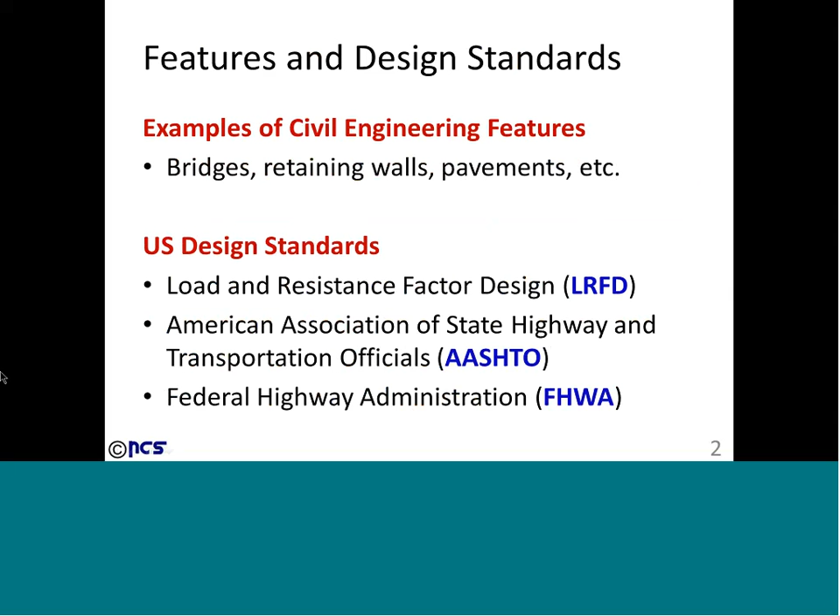Now the question comes up, what about LRFD versus other practices? The acronym LRFD is used specifically by AASHTO and the transportation practice in the United States. There are practices worldwide, for example Europe, Canada, Australia, Japan. In fact various agencies in the United States itself, like the Electric Power Research Institute, use nomenclature like limit state design or reliability-based design.

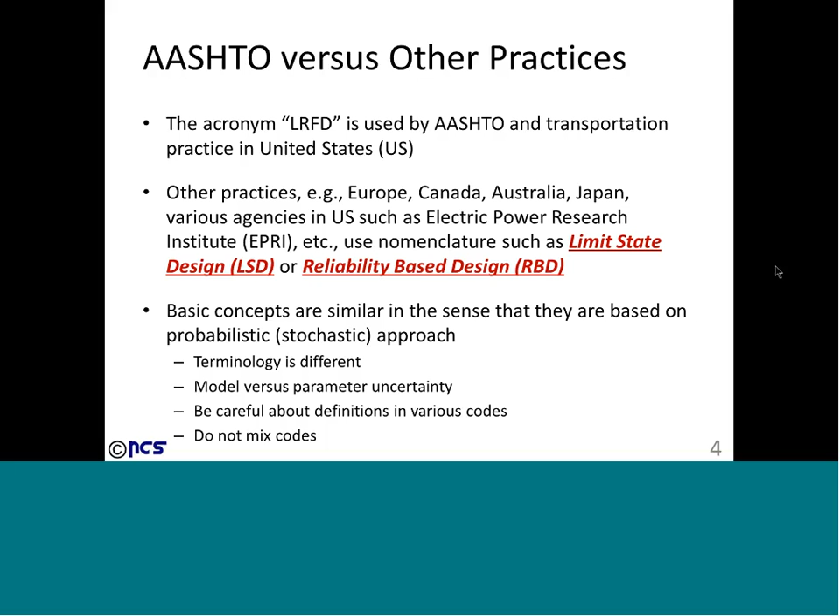So what I would suggest is that when you listen to this presentation, I'm going to make it a little bit generic so it applies in the United States as well as elsewhere in the world. What I would alert you is to be careful about the definitions in your respective codes, and one big thing is do not mix the codes. Don't start mixing the Euro code with the AASHTO code and so on, because you will be mixing several different concepts and creating problems.

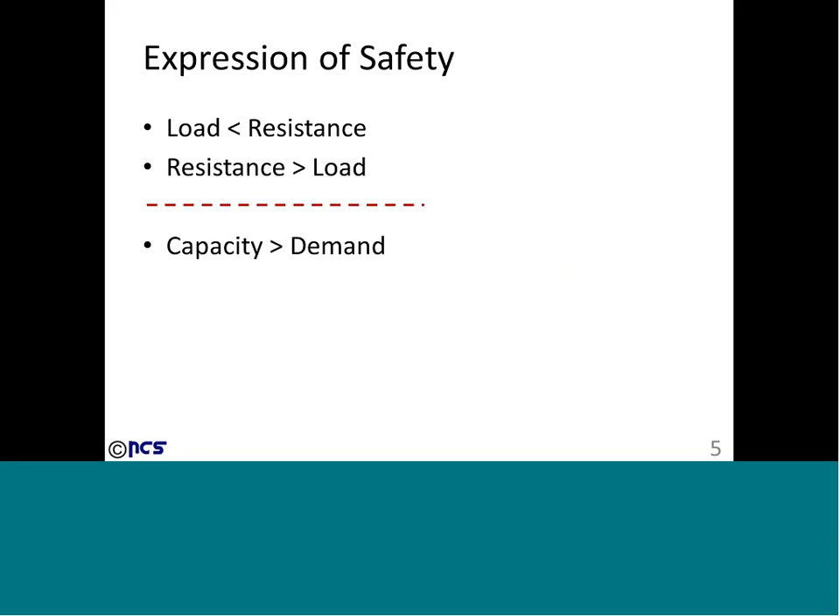Regardless of whether you are in Europe or Canada or Australia or wherever you are, the basic thing is that we want to make our structures safe. What is the basic expression of safety? Well, one might call it load less than the resistance. Somebody might say it's resistance greater than the load. Or some people might want to talk in terms of capacity and demand, so capacity is greater than demand, or demand is less than capacity.

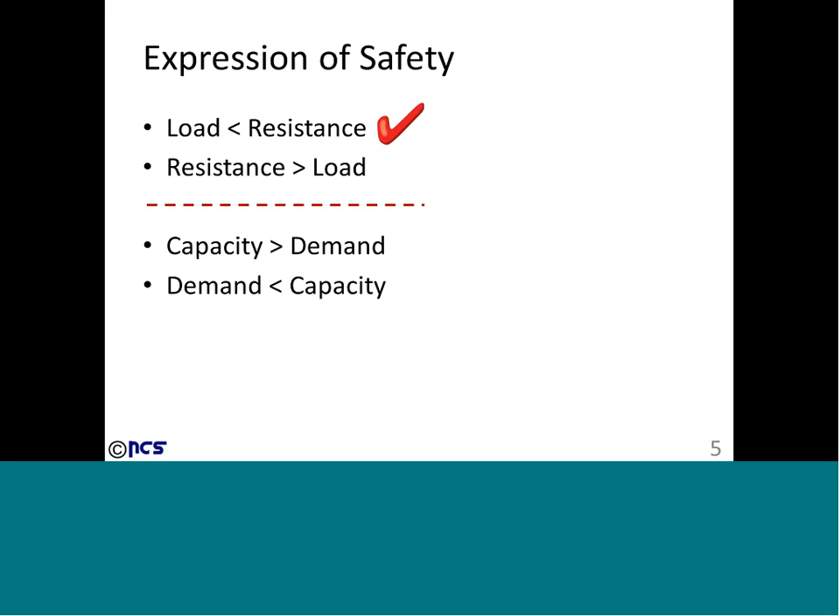In this webcast we are going to use the words load and resistance, and we are going to use the first expression of safety, which is load less than resistance. When you think about it, that expression of safety is also called a limit state, because if you violate that expression, you are violating a certain limit which can create a problem for you. So load less than resistance is a limit state, which if violated may lead to undesirable consequences.

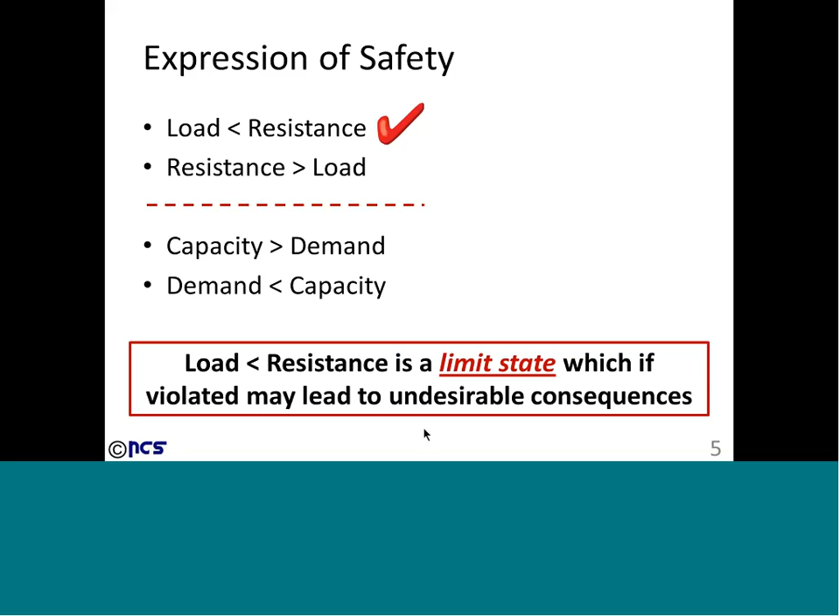Now, what is an undesirable consequence? Well, that would depend on the owner, on what they consider to be undesirable. We'll take a look at all of those kinds of aspects as we go on in the webinar. Now that we know that the expression of safety is also called limit state, and that's load less than resistance, let's designate load by Q and resistance by R.

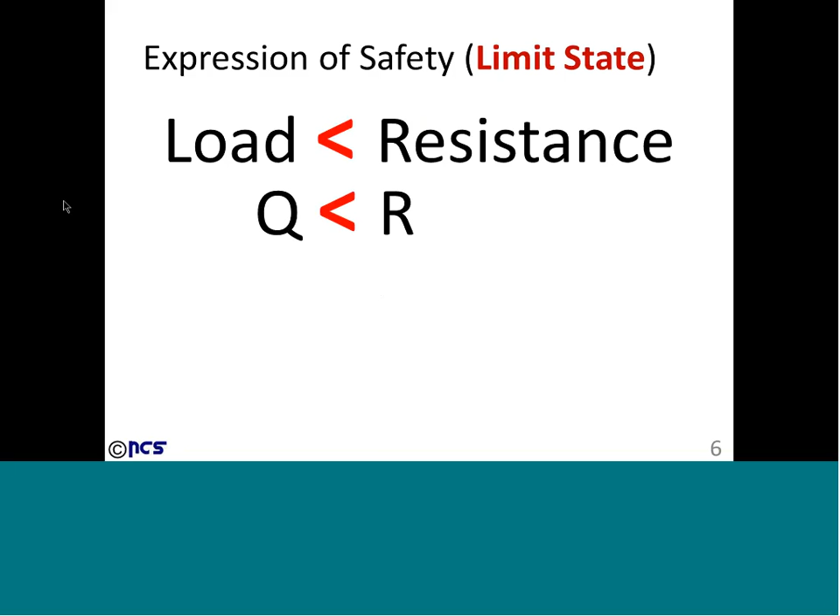You see that red symbol in there, less than? My question is, what does that mean? You might be thinking, why is this fellow asking me that? But what is really the meaning of less than or greater than in these kind of expressions? The meaning of less than is that load is less than the resistance after all the uncertainties in the load and resistance have been accounted for. On both sides of the expression you have incorporated your uncertainty. To characterize the limit state, you need a definition of uncertain events and uncertainty itself.

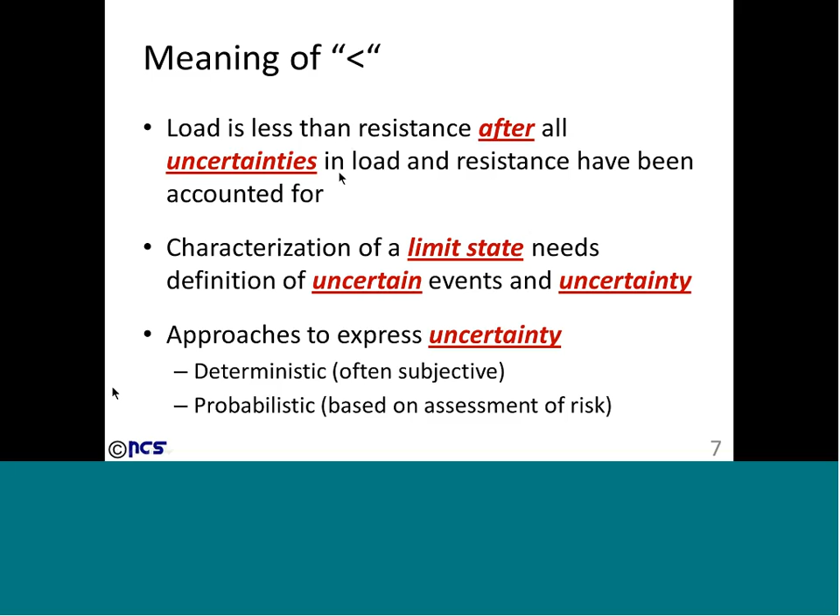So the question now is, how do I express uncertainty? There are two ways to do it: one is deterministic, and the other is probabilistic. The deterministic approach is often subjective, where people say, I feel it's safe, or if your structure has more resistance than the load, what we call a factor of safety. The other approach, the probabilistic or stochastic approach, is based on an assessment of risk.

Let's take an example. Everybody has driven on roads. Probably the way you came to your office today was driving a car, and you were on a roadway where there was a certain speed limit sign. What's the purpose of that speed limit sign? The limit state for that one is that your actual speed should be less than the speed limit.

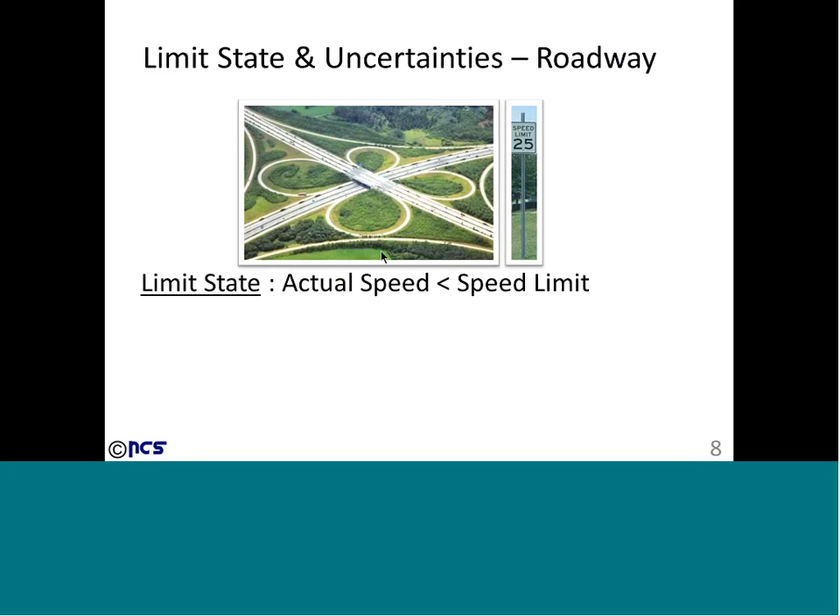What are the uncertainties in all of these things? The uncertainties might be the traffic count or data, the amount of traffic on the road. Even if you wanted to speed and it was bumper-to-bumper traffic, you could not have sped. Or if you have an empty road, then your temptation is to speed. It would also depend on the vehicle type and distribution, the traffic models used, and others.

But it's interesting - a stark reminder of a limit state every day is this fellow on the road in that car with flashing lights. If you are going to exceed the speed limit, you're going to pay the consequence, and that is an undesirable consequence. So you see how we can apply the concept of load and resistance factor design, also known as limit state, to commonplace applications.

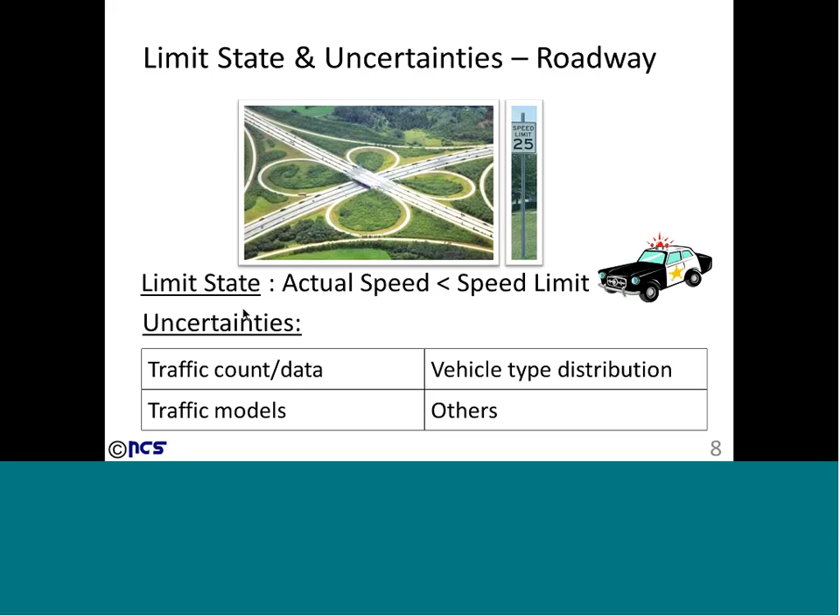And now this was for roadway. Let me take another example. This is a project which we had in Tucson where a wall just blew out on us. It was on a hillside, and what you are seeing is the portion of the retaining wall that just fell out on us. Now what's the limit state in this one here?

The limit state is that the load should be less than the geotechnical resistance. Geotechnical is for people like me who deal with soils and foundations, and if the resistance of that soil or foundation happens to be less than the load, then you have a problem. So our desirable limit state is to keep load less than the geotechnical resistance, and the structure should be safe.

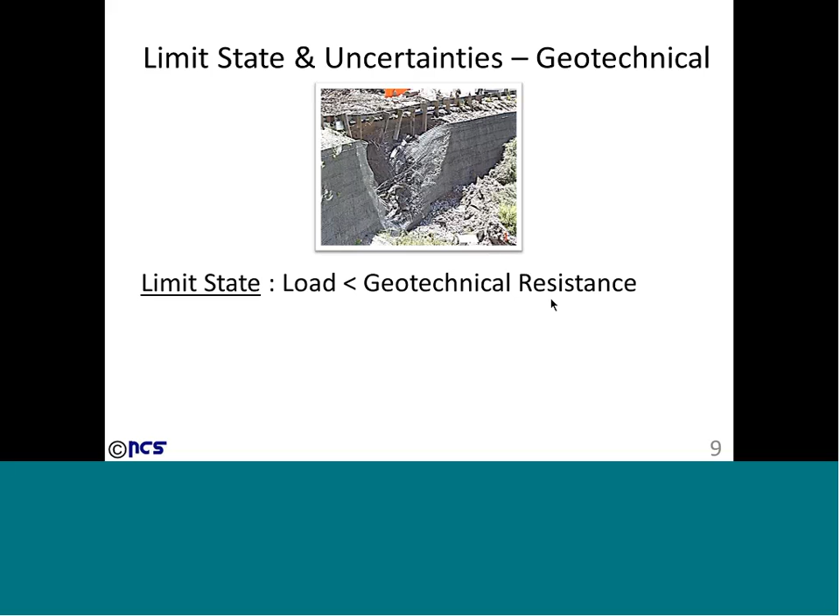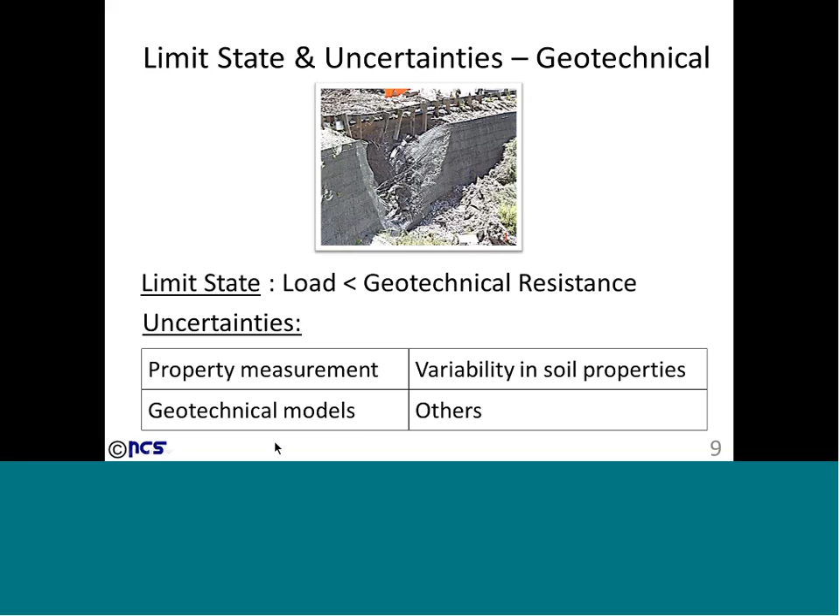So what are the uncertainties in this one? It might be the property measurement - how did you measure the load, or how did you measure the geotechnical properties? And once you define the geotechnical properties, what was the variability in those soil properties? What kind of model did you use? There can be a host of other ones there.

When I keep saying others, well, let's talk about other examples of limit states. You can really start talking about limit state in your everyday life, showing up on time. For example, if your appointment somewhere is at 8 o'clock in the morning and you showed up a couple of minutes late, is that a limit state which you violated? Yes, you did. What were the undesirable consequences there? Well, that depends on what you were late for.

Population growth, for example - if there's a new town being planned and they planned for 10 million people population, and started developing the infrastructure resources for only 10 million, and then the population just grew on, and then there was an influx of population and it became 12 million.

Well, what happened to your resources? That's a problem there - occurrence of a crack in a structure. Look around your building wherever you're sitting. Do you see a crack in a structure? Is that a limit state?

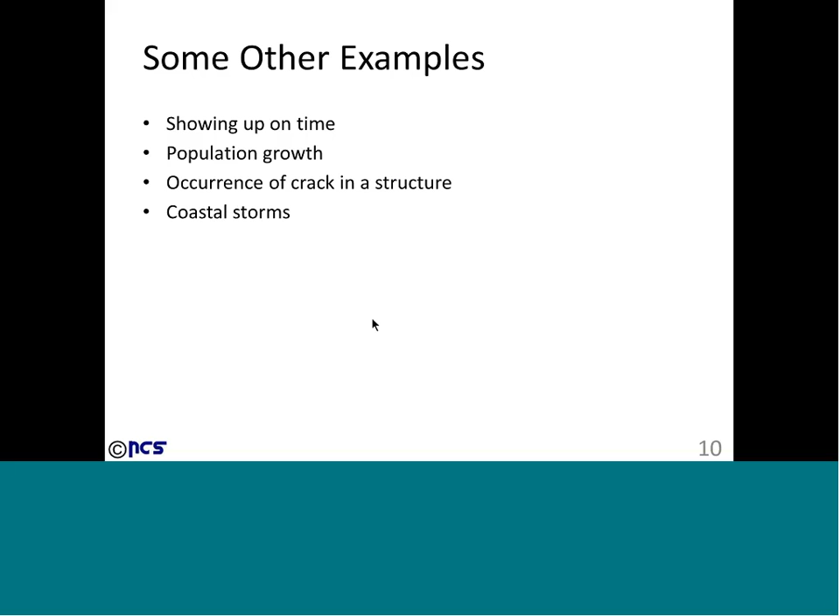Coastal storms, games - you can play games and you can have problems there. Conflicts, wars and things like that - you can use load and resistance factor design. There are many others. In fact, your imagination is your limit, and if you take a limit state based on your imagination, then consider this.

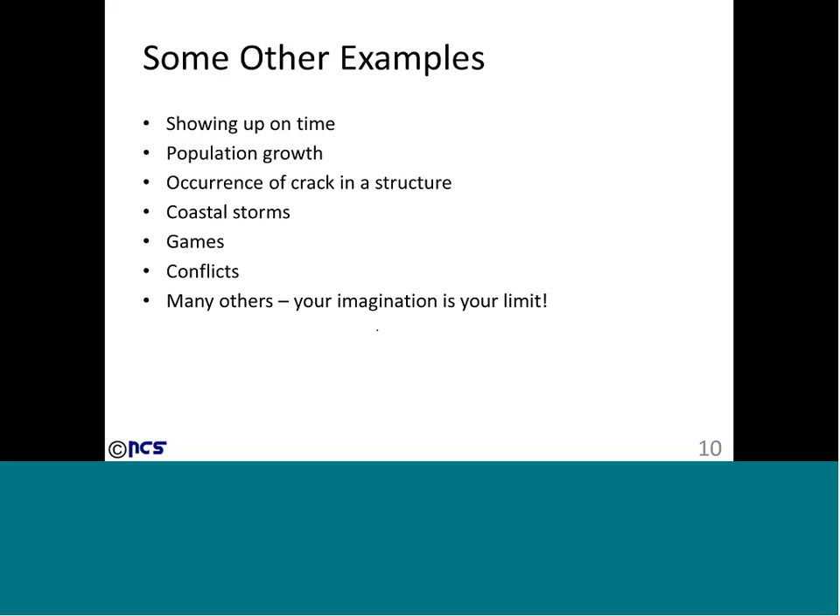The reality might be the resistance while imagination is the load, right? So what happens in all of these things is that you can use any consistent quantities on both sides of the inequality and express the limit state.

Now when you do that, you need to incorporate the uncertainty on both sides of the inequality. Now, what uncertainties? There can be many uncertainties. I'll take some of the most mundane or the esoteric ones.

This happened to be in February of 2011. So you can have coastal storms, you can have superstorms. We are in an election season here in the United States. How will the whole thing turn out? There's uncertainty on both sides of the political parties.

You can have others - you might have construction, bidding, human error, a bunch of different ones there. So the question now comes in: all right, I got a lot of uncertainty. Let's first of all try to categorize it. When I try to categorize it, I might say it is a natural uncertainty or a knowledge uncertainty.

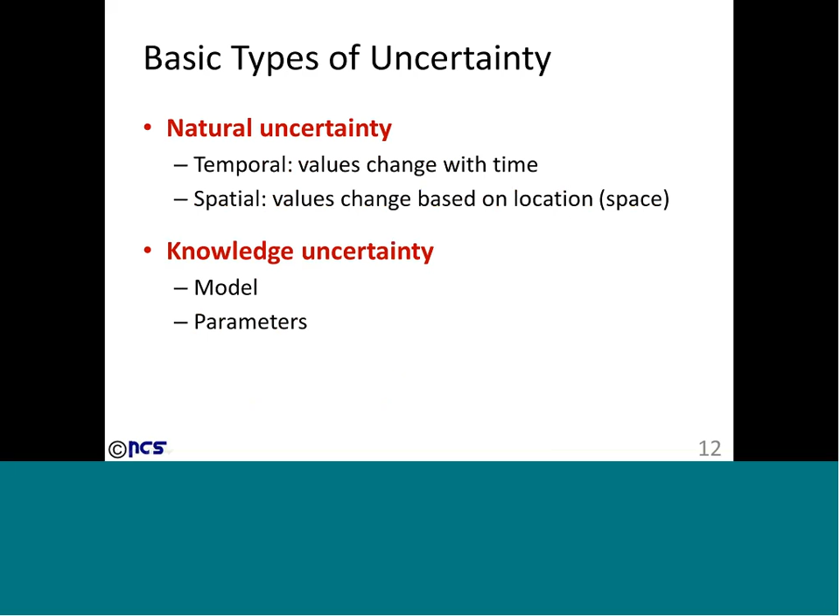But to all of those uncertainties, we are going to be applying a model to show our knowledge of the uncertainty, and each model is going to have certain parameters which by themselves will have uncertainty. So how do we characterize all of these things quantitatively?

Where do uncertainties apply? Well, all of us agree that it applies to all aspects of design, regardless of the structure type, size, or location. Whether I'm sitting here or I'm in Argentina or in Australia or things like that, the uncertainties still stay there. In fact, they affect all design features.

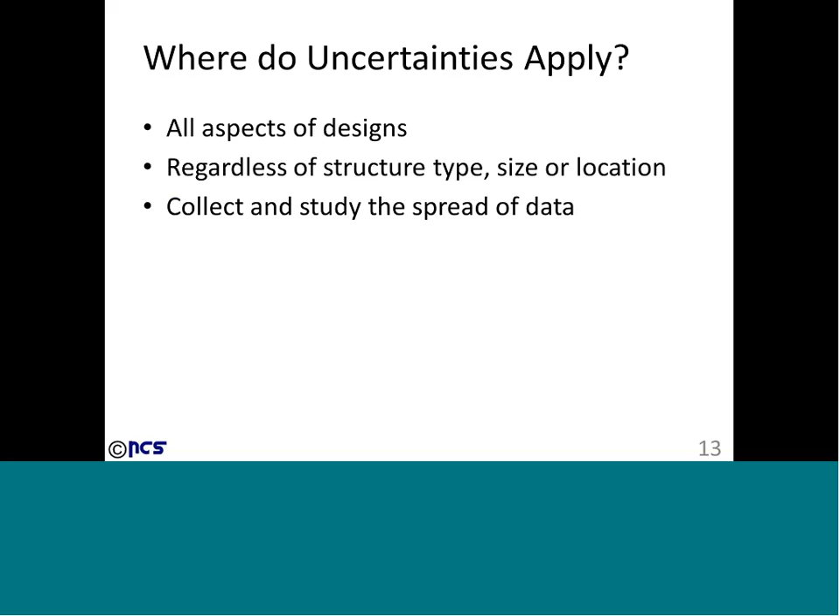So what should we do? Well, we need to try to quantify uncertainty. So what we are going to do is try to collect the data and study the spread of the data. How do we do that?

Let me take a very simple example. I got a concrete cylinder here - I've shown a cylindrical shape. Let's assume it's a concrete cylinder and that I'm going to put a load on top of it. When I put a load on top of it, I get what I call unconfined compressive strength of a cylinder in pounds per square inch.

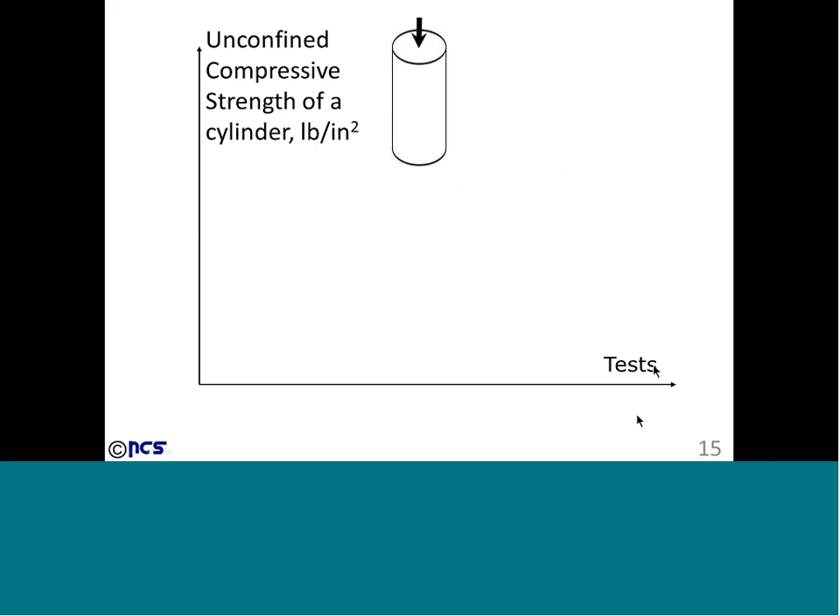And let's say I'm going to do a number of tests which is shown on the x-axis, and let's say I did 28 tests. I got a bunch of different values of the unconfined compression strength. The maximum value was 3600 psi, the minimum value was 2300 psi, and if I take an average of all of these things, the mean value, then that's 3100 psi.

Well, that's nice - I see all of the data spread around the mean. Is there a way that I can capture that data spread? Well, what we can do is say the mean is the peak value and the data spreads around from it, and as you go away from the mean value on either side, the chances of you having a data point lying towards the tail end of it starts to become remote. Not zero, but a small amount there.

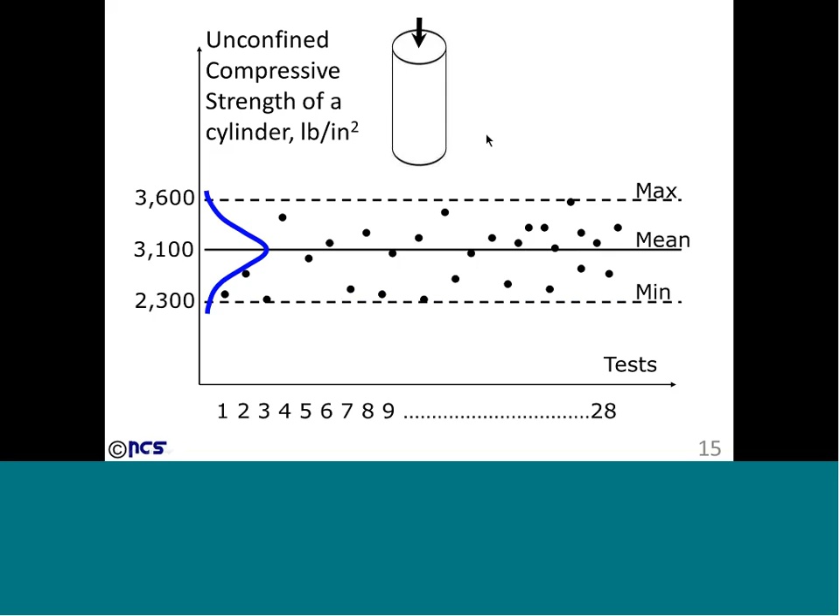So this kind of a curve, we can now start looking at it, and it's called a probability distribution function or probability density function or whatever you want to call it there.

But it looks like a bell, right? So oftentimes it's called a bell curve when it's a normal distribution. This particular curve was for a certain max, minimum, and mean value for the data set I showed you earlier. What happens if I add more data points to it? The shape of the curve would be sharper, taller, because now we are less uncertain since we have more data.

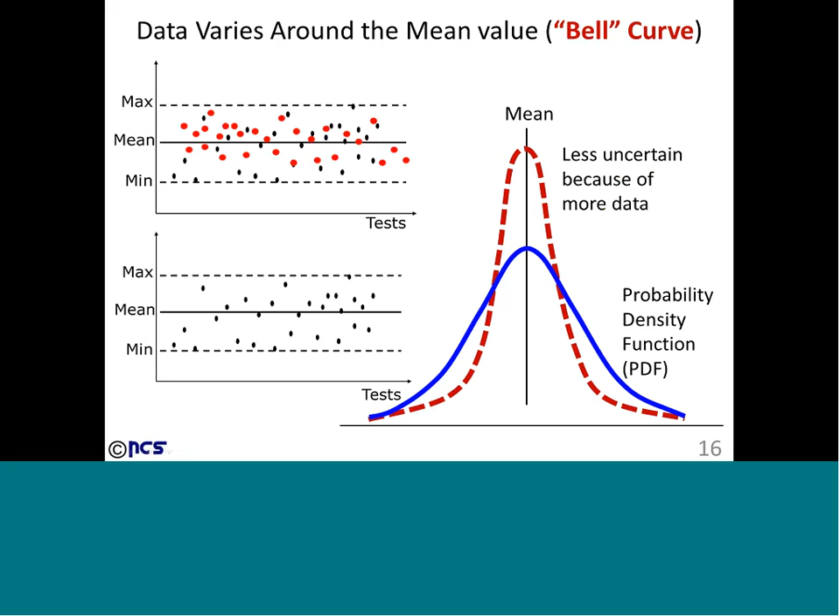So you see, it all comes down to how much data you have and how you are going to be fitting a probability density function or probability distribution function to characterize the uncertainty. Let me repeat again: the mean value is the most probable value, and there is a chance that value might not occur, and that chance is described by the shape of the probability distribution function around the mean.

So when we look at the probability distribution function, we're trying to address: what is my probability that a limit state might be exceeded? What's the probability of something happening? Well, that's where we have to look at the area under the curve, because the probability of 1, or some people call it 100%, is actually the area under the probability distribution function.

So if I look at this bell curve or normal curve, you'll see a nice bell-shaped curve, and M is the mean value right at the center where there's a peak. S is the standard deviation, and we can use coefficient of variation, which is standard deviation divided by mean. Coefficient of variation is often a better method to characterize the spread in the data, because you're often dealing with several different data sets with quite different mean values and standard deviation values. So to compare variables across different data sets, it's useful to have coefficient of variation, but that's your choice.

Now you see what I'm calling it here - I'm calling it a two-tailed representation, because I've got a tail on one side and a tail on the other side. Depending on how far I go from the mean, either to the left or right side - for example, if I go 1 standard deviation on each side, then about 68% of the data is contained within that zone.

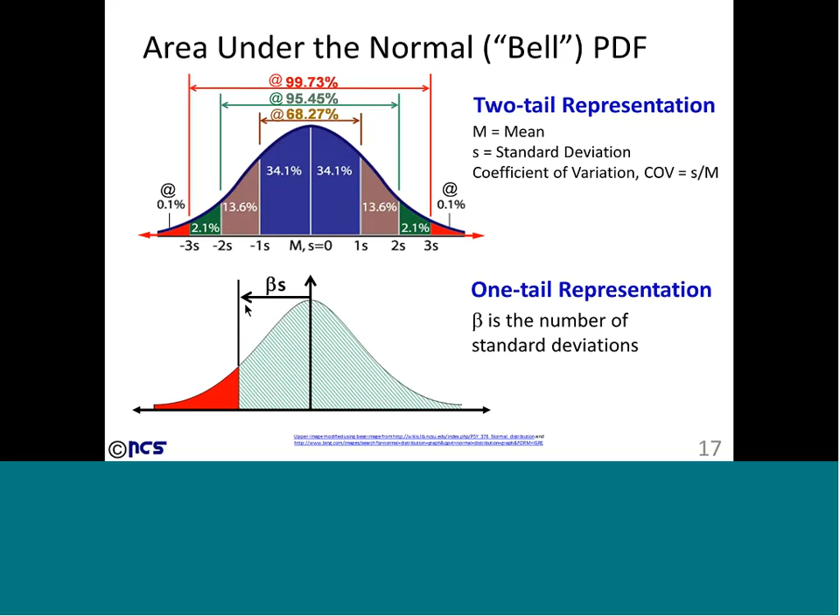I'm going to be using the same concept in terms of what I call reliability index later on. So what I'm showing to you is that the things which are already available in the literature, how we will be using it in the load and resistance factor design concept.

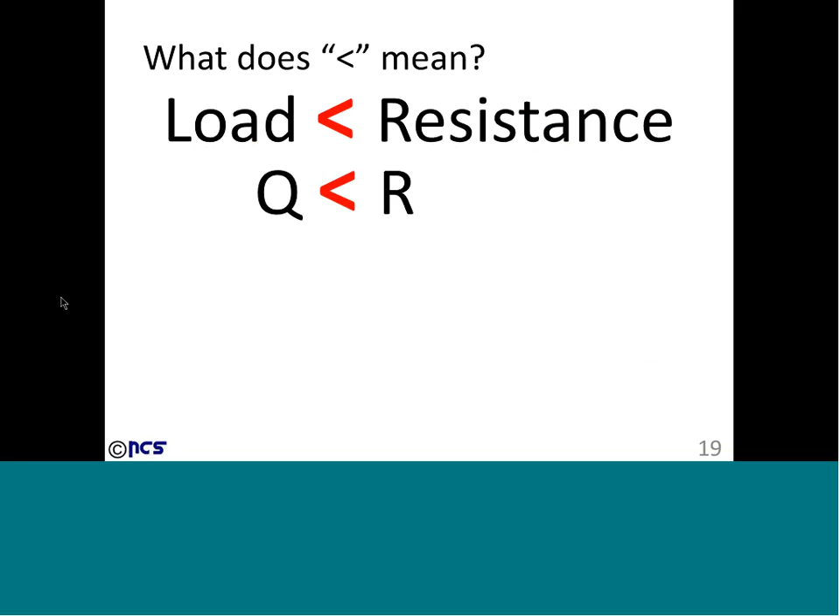All right, so now coming back to this slide again, what does the less than mean? Well, Q less than R means that we need to account for uncertainty on the load side, uncertainty on the resistance side. So I can have a probability distribution function on the load side, and I can have a probability distribution function on the resistance side.

Where do those distribution functions come from? Well, let's look at it as follows. We'll come to that in a minute, and @RISK gives us an opportunity to have a number of different distribution functions. But before that, let's study this concept of safety once more so everybody understands how we are going to use it.

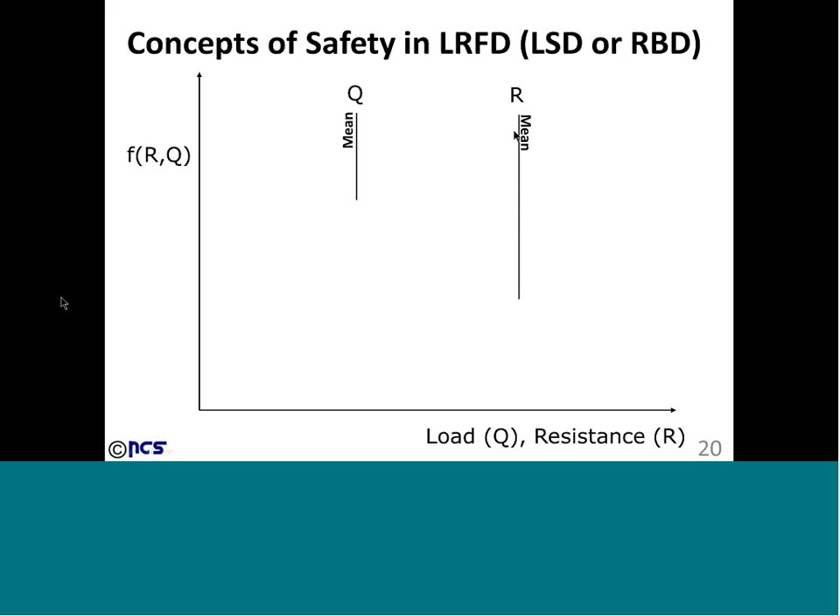We know that the load has to be less than the resistance, right? That's the limit state. So if on the x-axis I'm plotting load and resistance, then by that definition, the load has to be on the left-hand side of the resistance, correct? Because only then it would be load less than resistance. And what I'm plotting here is the mean value of the load and resistance. The distance between the two, the resistance minus load, one can think about it as a safety margin.

More the distance, the safer the design feature. Or you might take the ratio of the two and call it the factor of safety, the resistance divided by the load, the mean values, and as long as that value is greater than 1, then the structure is safe. Well, the safety margin and the factor of safety are what we call the deterministic expressions of safety.

Why? Because nowhere in this definition have we accounted for the spread of the data around the mean. We simply use the mean values to get an idea about safety. That's what deterministic thing is all about. But now, do you think a factor of safety greater than 1 means that the structure is absolutely safe? Or a safety margin greater than 0 means the structure is safe?

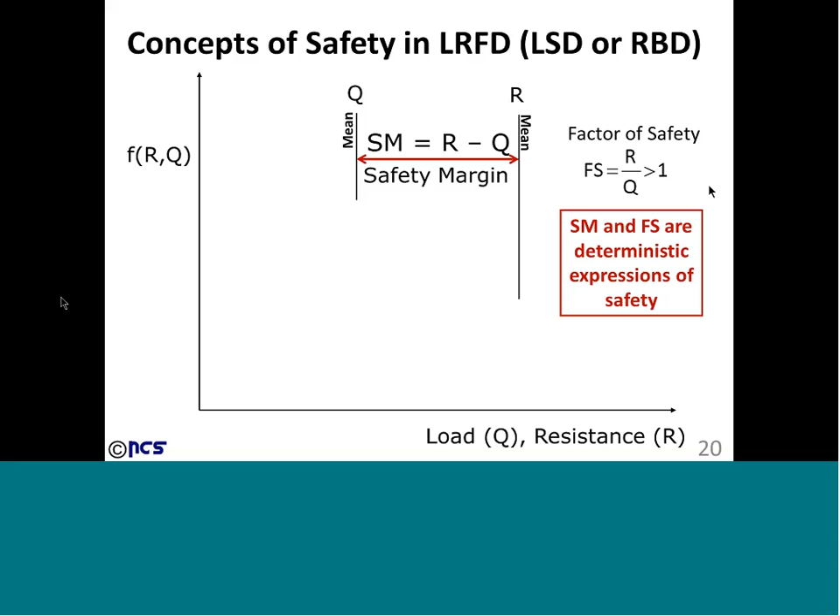Well, we are in for a rude shock now. How is that going to happen? Well, let me now plot the spread of the data. This might be the spread of the data for the load, and look at the tail end of it.

It goes quite far. Now I got the spread of the data from the resistance. That's nice, but they're overlapping. What is going on here? Well, in that overlap zone, I either have load greater than the resistance or resistance less than the load. Either way, it's trouble for me.

It's a danger zone. In that particular red zone or the shaded zone, which I just did here, there is a probability that failure can occur. So you see, my friends, what seemed safe from a deterministic viewpoint still has a probability of failure. And our job is to figure out what that probability of failure is, and that is the essence of LRFD.

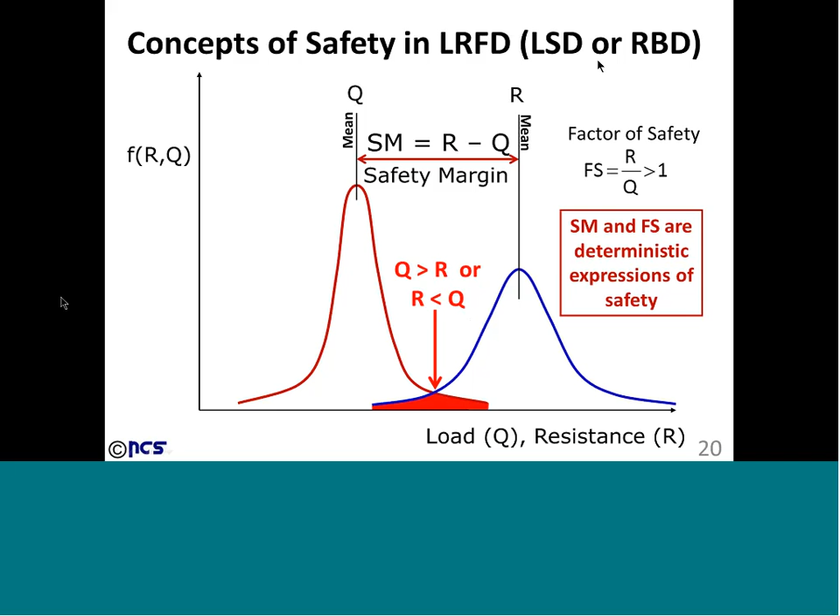Or if you want to call it limit state design, or if you want to call it reliability based design, or stochastic method, or whatever you want to call it. So we are going to study that.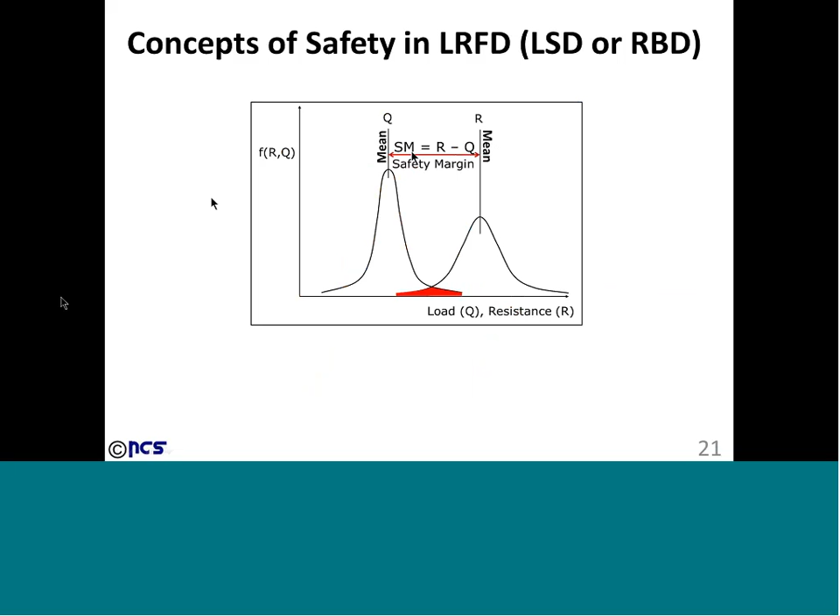So now when I look at it, I put a small inset of that figure which you saw on the previous slide there, and we learned that even if there is a safety margin, there is still a probability of failure. And now our job is to control the size of that red overlap zone by ensuring a certain safety margin for a certain probability of failure. When I say failure, what does that mean?

It can mean a lot of different things to different people. Basically, what I think of failure is a certain adverse event where the event is defined by the owner who's trying to understand the problem.

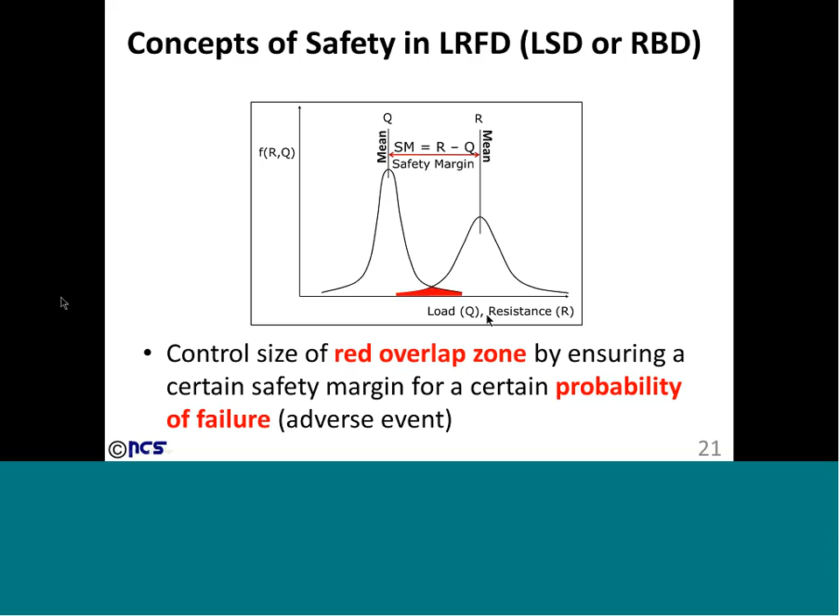So now when I take a look at it, the problem reduces to as follows: I need to control this red zone, or what I will call the danger zone or the overlap zone. How do I do that? Well, that's where I need to get into risk and reliability.

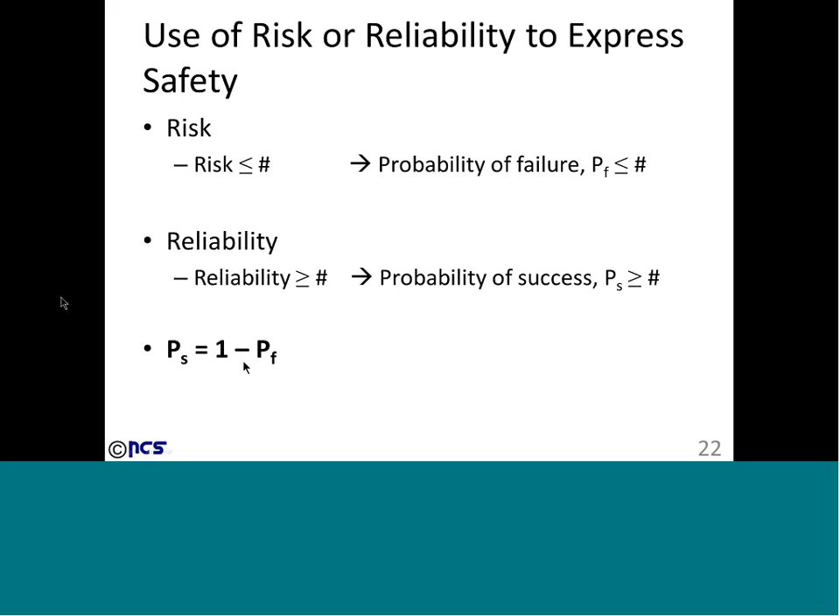Let's understand what risk and reliability mean. They're actually complementary terms. They do not mean the same thing. In fact, they mean exactly the opposite. Risk is associated with probability of failure. Reliability is associated with probability of success. Since the total probability is 1 or 100%, one can say that the probability of success equals 1 minus probability of failure. A very basic definition, but we need to understand that when we talk in terms of success, we are talking about reliability. When we talk in terms of failure, we are talking about risk. Keep that in mind.

Now let's talk in terms of numbers, just to make sure I hit home the point here: risk or reliability. Say probability of failure is 10%. What does that mean? When people say there's a 10% risk, they're actually saying that the probability of failure is 10%, or there's a 1 in 10 chance of failure.

There's a better way to talk about it. You might say probability of success is 90%, where you might say, hey, the car which you are buying from me is 90% reliable. Well, that sounds better than saying there's a 10% chance of failure, right? So that's one way of talking about it.

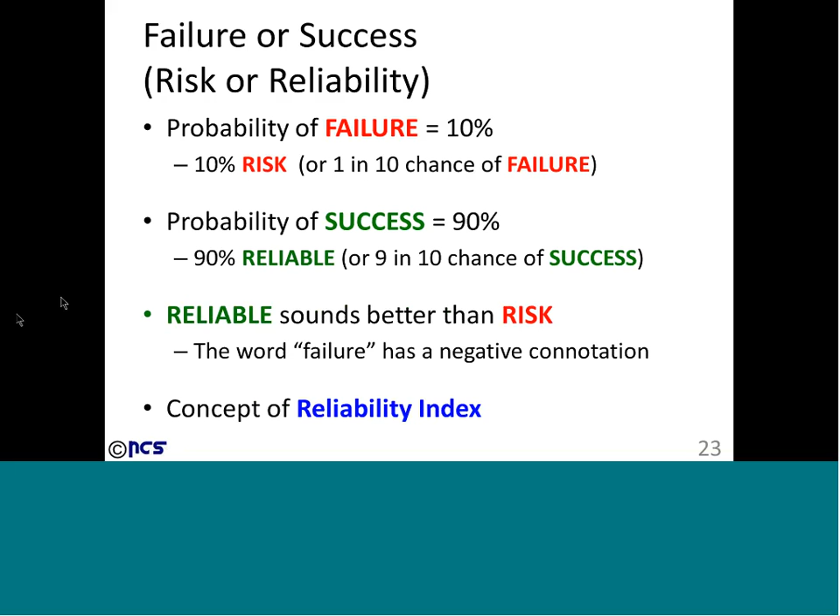So it's reliable. Reliable obviously sounds better than risk. Why does it do that? Because the word failure itself has a negative connotation, and we need to characterize that. So rather than talk in terms of failure, we are going to introduce a new concept called the reliability index. Now, when I talk about reliability index, by necessity I'll have to talk about the probability of failure, but the essence of all these design procedures - the LRFD, the limit state design, the reliability-based design - is all to characterize a reliability index. Let's see how that can be done.

I bring up this figure again, which you have seen before. The red overlap zone is what we are trying to control. That red overlap zone - listen to me carefully - it is basically an eye candy. Looks sweet to your eyes there, but it's just conceptual. We need to make sure that we can characterize the area of that overlap. You remember that area under the bell curve, where we went to the two tails and then I converted it to one tail representation?

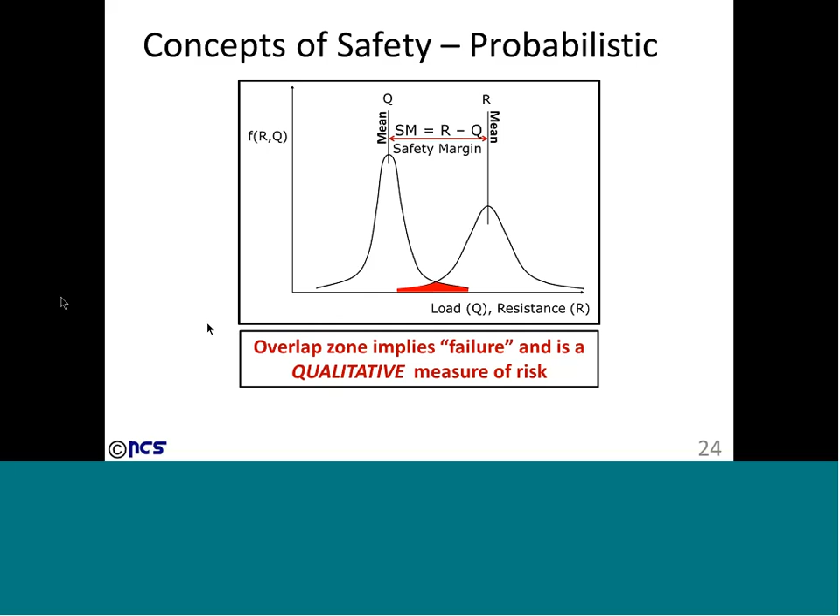Well, forget about two tails. I've got four tails here - two tails each for the load and resistance. And now two of those tails are overlapping. I have really made my life miserable here, correct? Well, I need to get a way out of this, because I need to measure that overlap zone. And how am I going to do that? I need a quantitative measure, and this is how I'm going to do that.

What I'm going to do is write a limit state. And instead of saying the resistance is greater than the load, or load is less than the resistance, I'm going to take these two probability distribution functions and deduct the probability distribution function of load from that of the resistance. Once I do that, I get a one-tail representation. Now I've combined two probability distribution functions into one. And magically, I get everything into a one-tail distribution, and all the concepts I told you before fall into place.

Look at that red zone there. You remember that red zone? I can figure out that red zone in terms of the number of standard deviations distance from the mean. You remember that?

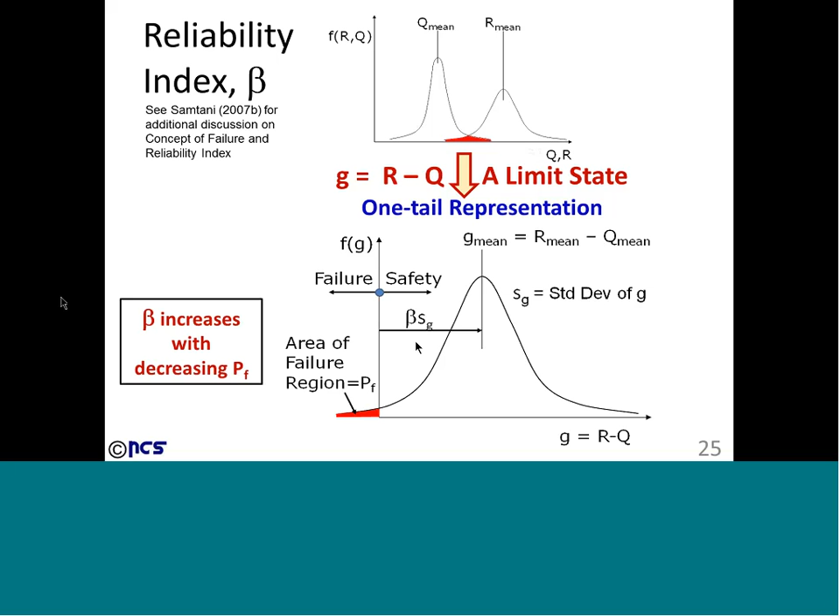Now, to close the circuit on this one here, what is the mathematical relationship between beta and the probability of failure or the probability of success? Well, I told you that the probability of success is equal to 1 minus probability of failure. So you can choose to express it whichever way you want, but basically it comes down to measuring the area of the curve to the left-hand side or the right-hand side of the vertical axis.

If you measure the area of the curve to the left-hand side, it's the probability of failure. If you measure the area of the curve on the right-hand side, it's the probability of success there.

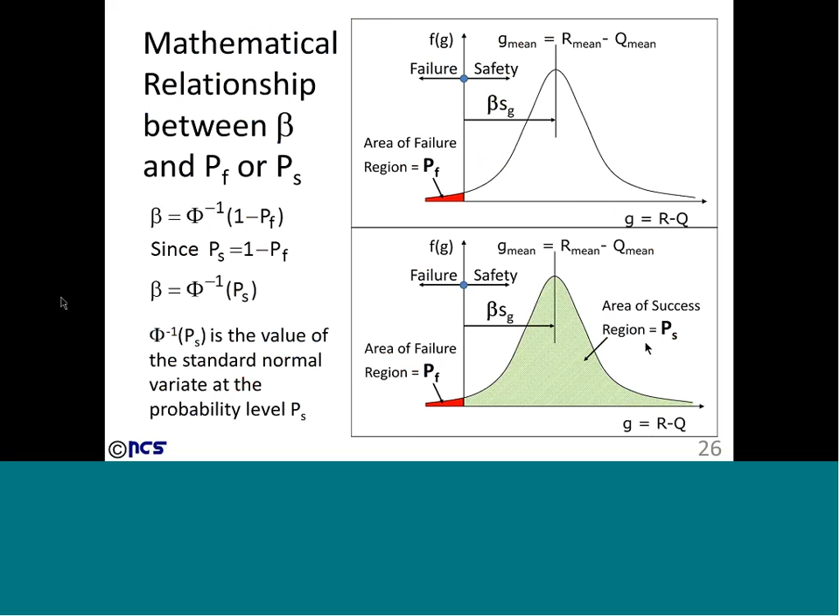Microsoft Excel has a neat little formula where it defines the probability of failure. Now, the beauty of the @RISK program is that it is indexed to Microsoft Excel. So anything which you have in Microsoft Excel is available to you in @RISK, because @RISK is an add-in to Microsoft Excel. So now we have got two very powerful programs working together at our fingertips, and we can work magic on this one here, and I'm going to show you all of those things.

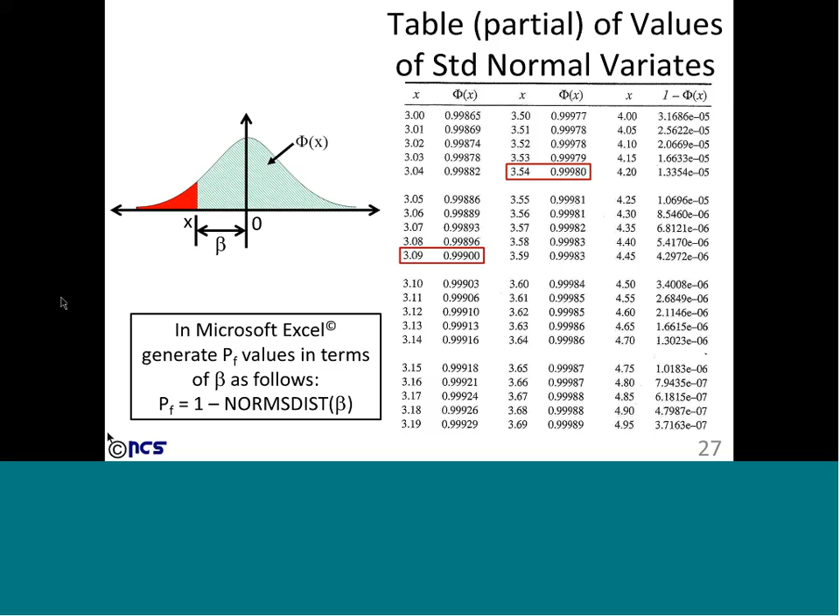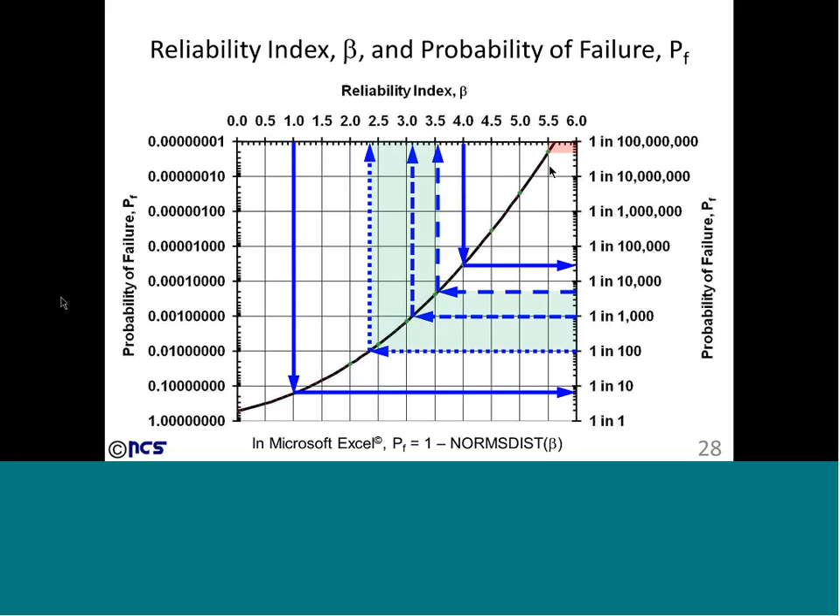To put it in context again, all of this probability of success, failure, and the reliability index, I put together a simple table. Success on the left-hand column and probability in the three columns, expressed in percentage or 1 in X. So 90% success is 10% failure, or 1 in 10. If I want to express it in terms of reliability index: 1 in 10 means a reliability index of 1.3. 99% success is 2.3 reliability index. 99.9 is 3.1, 99.99 is 3.7, 99.999 is 4.3, and 99.9999 is 4.7.

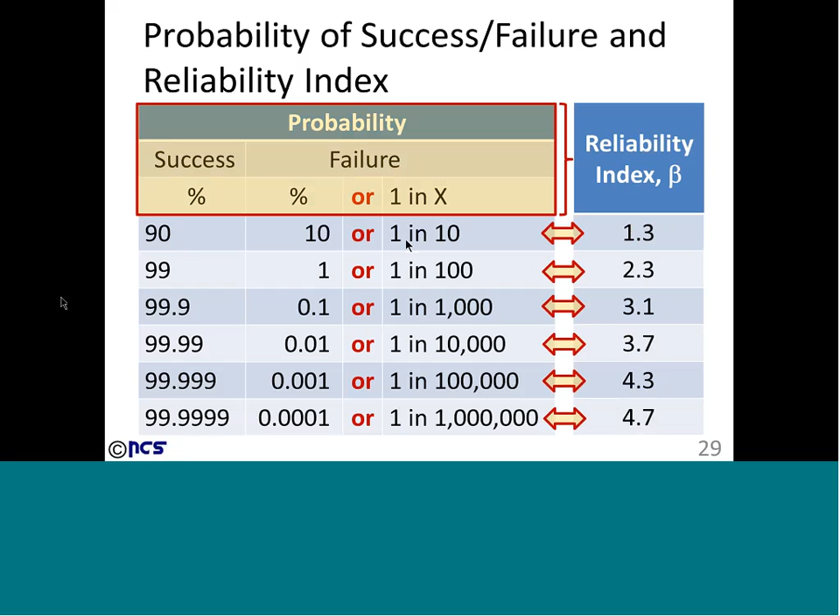Coming back to civil engineering features, what AASHTO has said is that the probability of failure we want for superstructures and substructures is 1 in 5,000, and for our foundations is 1 in 100 to 1 in 1,000, exactly what I showed you in the previous slide. What it means is that our playground for reliability index is 3.54 for superstructures and about 2.33 to 3.09 for foundations. All right, that's good, now we know what we are dealing with.

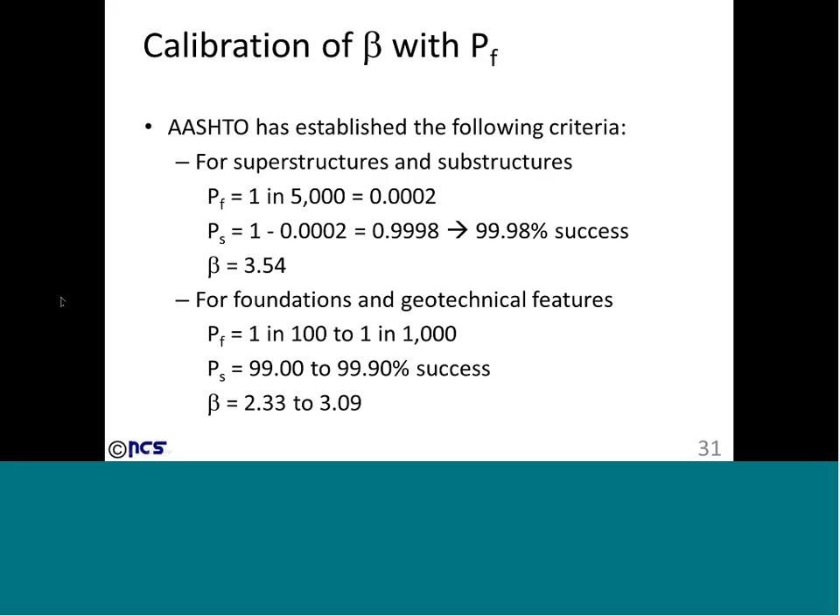Remember, I told you early on that you have to define uncertainties and figure out what you are working towards. Now that I got my marching orders, I know what I'm working towards: a reliability index ranging from 2.33 to 3.09 to 3.54. That's my play field, okay? And how am I going to achieve that desired level of reliability?

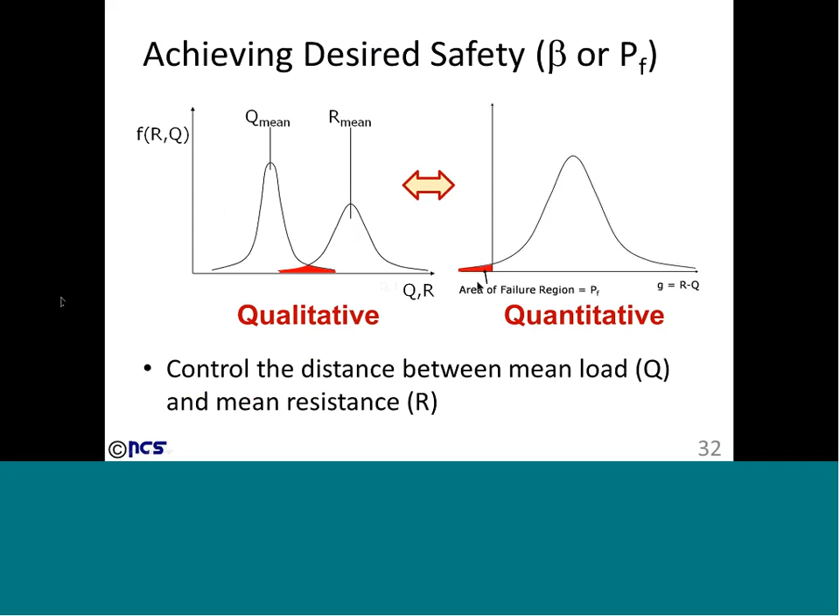Well, I'm going to go from the qualitative overlap zone to a quantitative overlap zone, which is the area of the curve to the left-hand side of the vertical axis. Here is what I'm going to do: take a look at this figure again, you're seeing it quite often. You see the distance between the mean load and the mean resistance. Now pay attention to me. To control this red overlap zone, I'm going to take the mean value of the load and multiply it by a certain factor, gamma.

Okay, I'm going to increase my load. Why am I going to increase my load? Because I'm uncertain about that load, and because I'm uncertain, it would be prudent for me to use a larger value of the load than what I've computed. So gamma is a load factor which accounts for uncertainty in the load side.

What about resistance? If you've got a certain resistance, and if you're uncertain, what are you going to do? Increase or decrease it? Well, if I'm uncertain, then I'm going to play it safe and decrease the resistance. So I'm going to multiply it by a factor called phi, which I'm going to call a resistance factor.

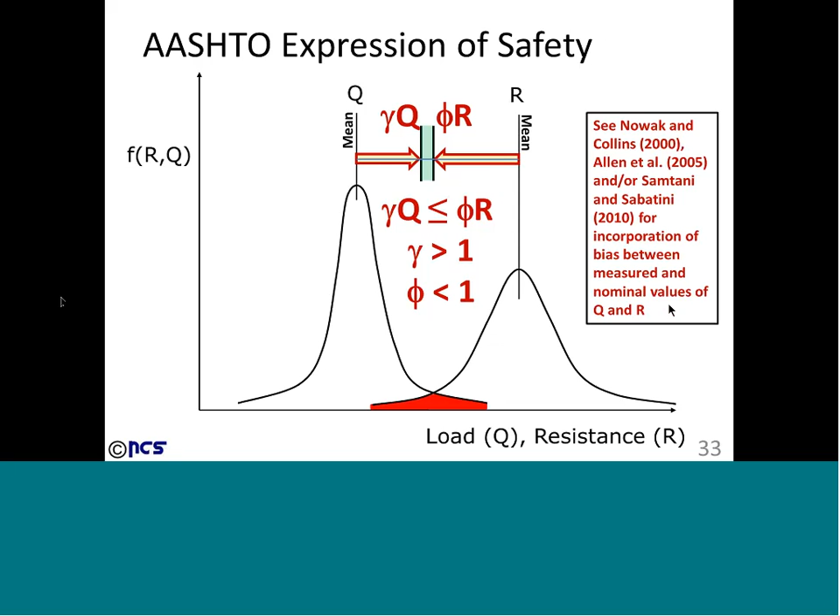But for the purpose right now, we have a load factor which expresses the uncertainty in load. This is the load factor on the left-hand side of the equation, and then I got the resistance factor on the right-hand side. And basically, instead of load less than resistance, I'm going to call it factored load less than factored resistance, and that factoring takes into account the uncertainty on each side of the inequality.

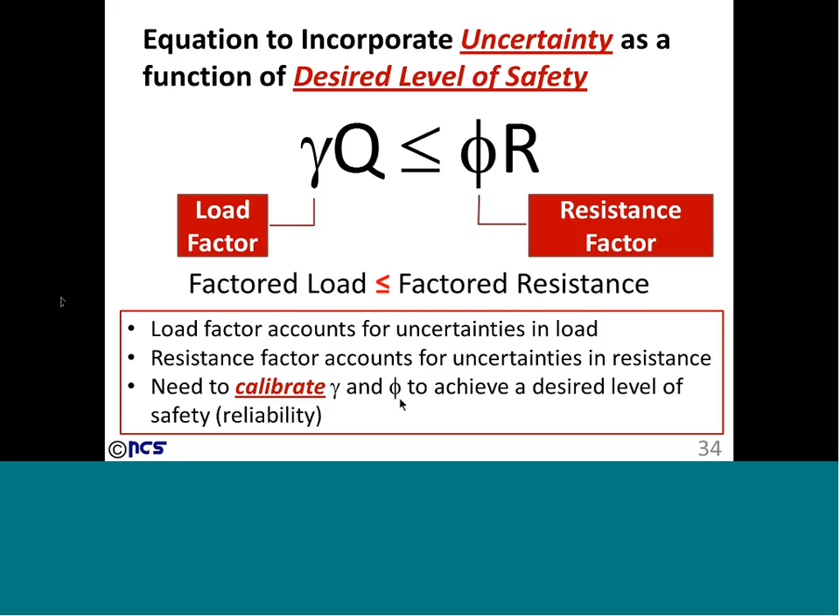So, here is the summary. Load factor accounts for uncertainties in load, resistance factor accounts for uncertainties in resistance, and we need to calibrate the load and the resistance factor to achieve a certain desired level of safety no matter what you are trying to do in life. Okay.

How do we do that? There are different calibration processes. You can have closed form solutions, graphical solutions, numerical solutions, or Monte Carlo simulations. There are some good references here by Haldar and Mahadevan and Nowak and Collins for civil engineering facilities. And of course, with @RISK software, its power is that it can allow you to do Monte Carlo simulation, Latin hypercube simulations, and calibrate the load and resistance factors in LRFD.

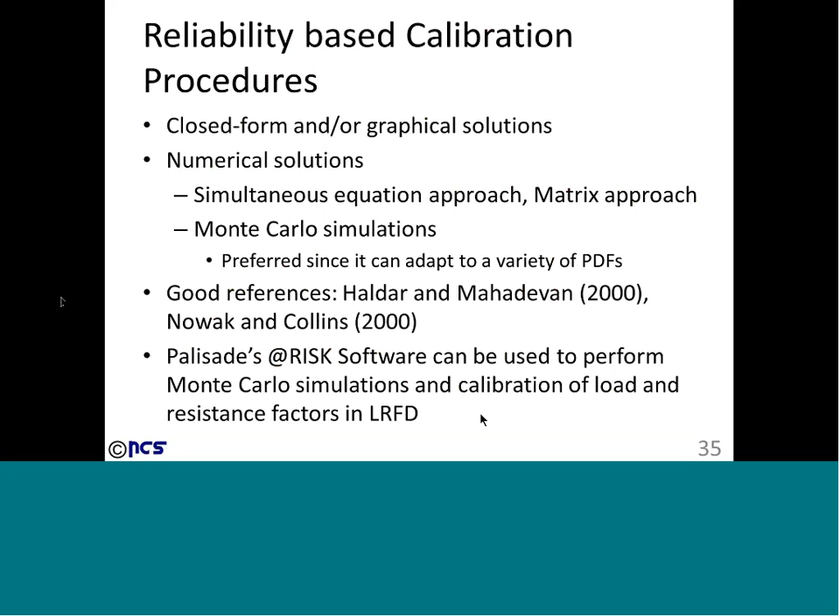So I'm going to shift my focus onto @RISK now, now that we understand the concept. In @RISK, you have a number of different probability density functions, PDFs. In fact, I'm showing you only a part of those here. If you go into version 6, there are many more.

Now, when I look at it, more is not always better, right? It's almost like going to a restaurant with a huge menu and now you have to make a decision. Well, yeah, we've got to make a decision to use something for load and resistance, but let's see if we can come up with something rational.

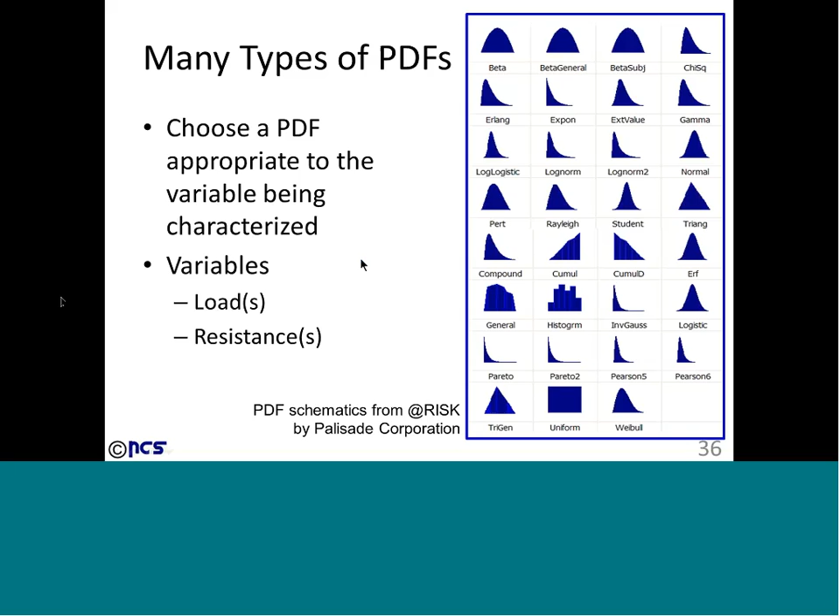All of these distributions, I know there's uncertainty on the load side and uncertainty on the resistance side. So I can describe the uncertainty on the load side by any one of these distributions, and also on the resistance side, I can have any one of these distributions. That is the power of @RISK.

Let me tell you why. Because if you were to do this by closed form solution or by hand, do you realize the equation for a Weibull distribution or a Pareto distribution or a beta general and things like that? It's not as easy as it is for a triangular distribution, or a log normal distribution, or a normal. It becomes very difficult.

So the beauty is that once you have this @RISK program, you can select the distribution, and it has already got the equations programmed in there.

Now, what do we do in civil engineering? Oftentimes for loads, we use the normal distribution. For resistances, we use the log normal distribution. I am a fan of using the beta or beta general because I don't believe in open tails in civil engineering. If a load is 100 kips, is there a chance it can be 0 pounds? No, it's probably somewhere between 80 and 120. So there are finite ends there. That's the beta distribution.

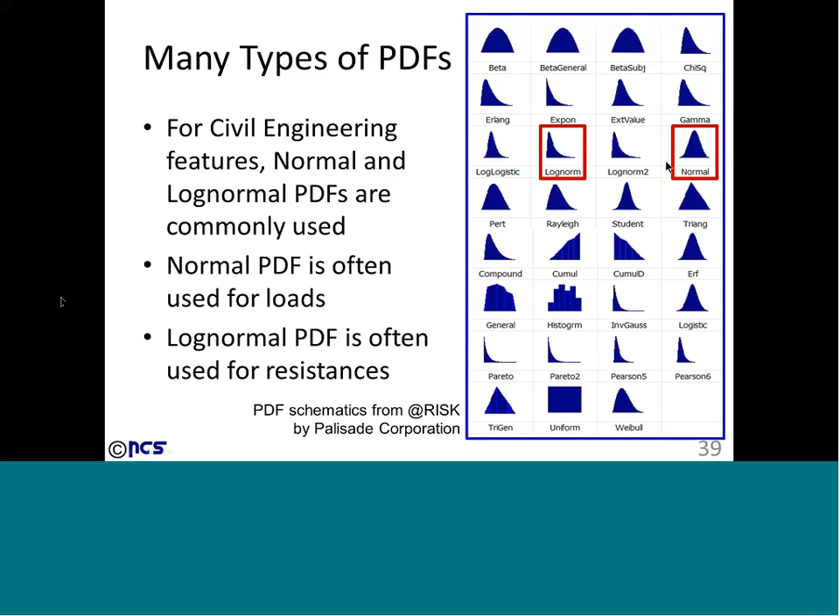But the fact of the matter is that oftentimes people use normal distribution and things like that, or log normal distribution. So let's stay with that in this particular presentation.

So what I'm going to do now is switch gears, go away from PowerPoint into my Excel spreadsheet to demonstrate how @RISK is used. Before I go there, I pre-programmed a spreadsheet to set up a simple model. For simplification, I set up a model with certain standard deviations and means. I've identified the uncertainties and the type of distributions.

Just for your sake, when you start running your own things and say, on this fellow's computer when he was lecturing it seemed to run fast or slow, or what version of Excel he was using, I put in there the system I'm using along with Microsoft Excel 2010.

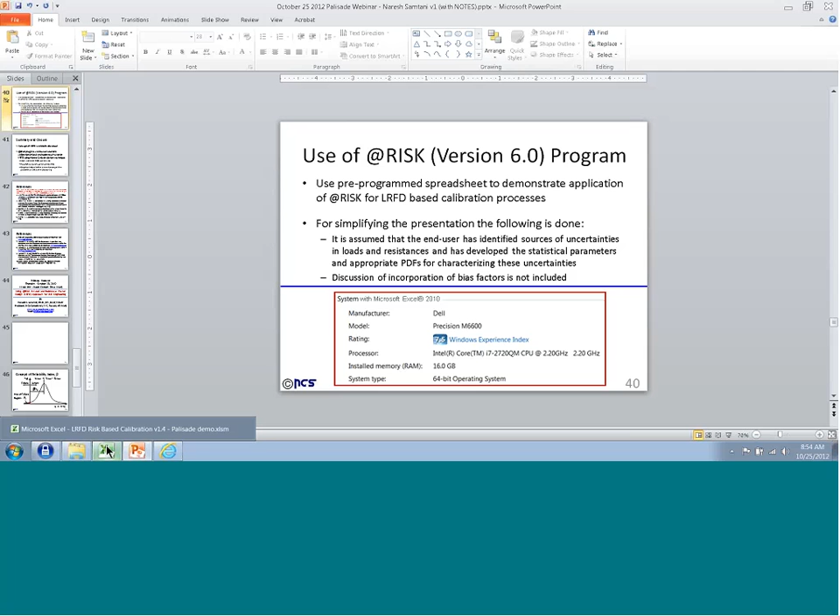So now I'm going to start zooming in on this spreadsheet so you get a feel for what's going on there, okay?

All right, let's say I'm designing a bridge. A bridge weighs a certain amount, so I'll call that the dead load. There will be traffic on the bridge, so I'll call it the live load. There can be different loads in there - it can be the wearing surface on the bridge, like the pavement surface, or it might be a post-tension bridge and so on. The fact of the matter is that the bridge needs to have certain resistance for it to stand up.

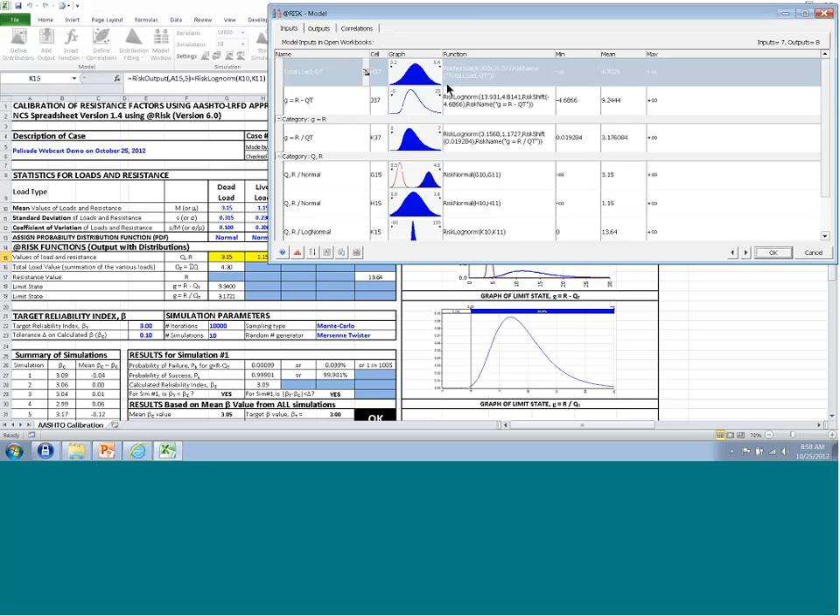You can go into the model window here, and it will show you all of these different distributions in a nice pattern, but I generally tend to look at the histograms because it gives me a good idea about whether the number of bins in the histogram is a good number, and I can adjust that.

Now here is what I'm going to do. I got this dead load and the live load, and I'm going to add the two and see what that distribution is. If I add up the mean values of the two, 3.15 plus 1.15 is 4.3, right? That's the mean value.

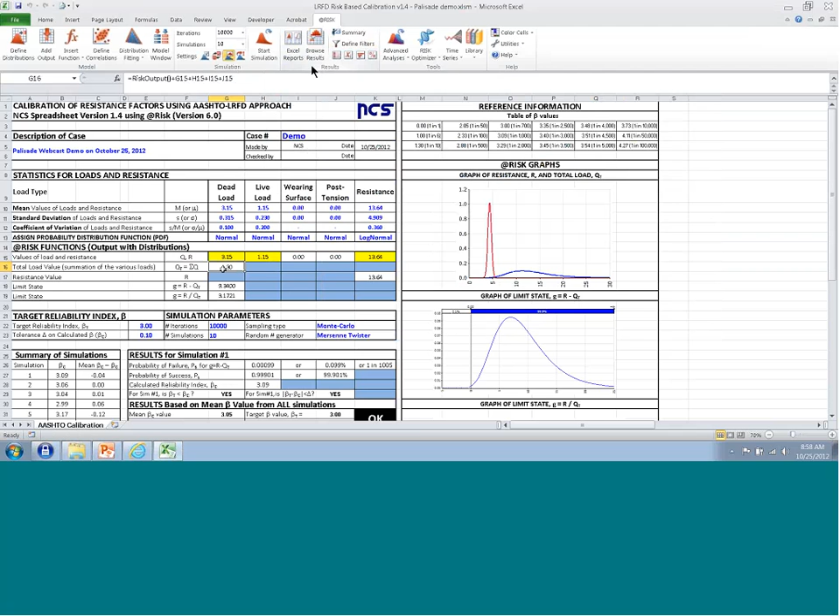So when I added the two, what kind of distribution did I get? Well, since I'm adding two normal distributions, it should be pretty much a normal distribution. So let's go take a look at it. Here is the distribution, and it looks pretty much a normal distribution.

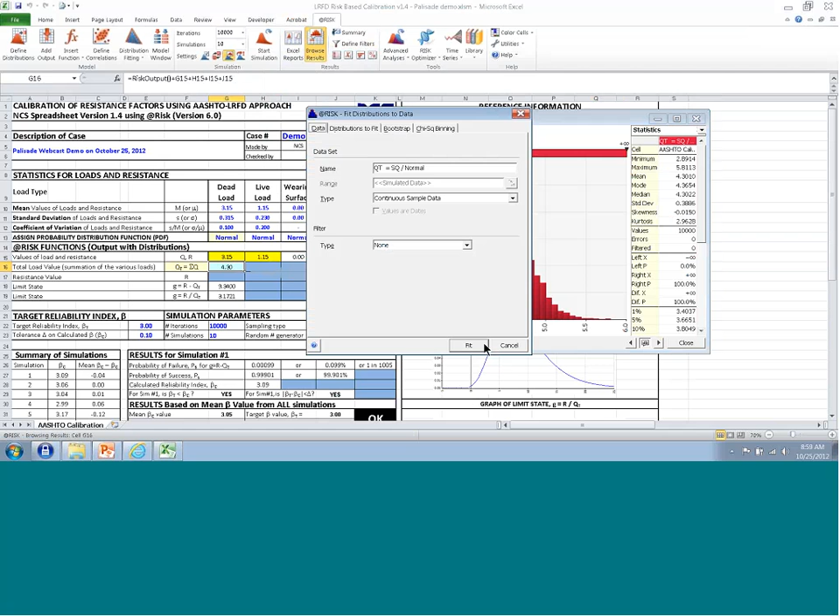And if you really want to figure out whether it's normal or not, you can go and fit a distribution. So let's fit distributions here. And it went in there, and you see what came out at the top. The normal distribution function came out to be the best fit, and that's what this red line is showing. So that's a normal distribution.

Now you can come and say, show me how the Weibull looks like. That's the green curve, that would be the Weibull distribution. What would happen if you got a logistic distribution, Laplace distribution, exponential distribution? Well, obviously the Laplace is not a good fit. I mean, you can go into a Levy distribution and say, whoa, no, that's not a good case.

So let me turn these things off, and let me go back to my normal distribution. That's a good fit. I'm satisfied by it.

Now let's do something interesting. This was the addition of the two loads. Is there any way to figure out how they were added? Yes, take a look at this one here. I'm going to make this thing wider so you can see what's going to come your way.

I'm going to use the overlay functions in here, and on top of that one, I'm going to overlay the distribution due to dead load and overlay the distribution for the live load. I just clicked on those two cells there, let's see what happens. I'm going to take this first simulation and look at this one here.

It's a nice graphical distribution where if you look at this green curve here, the mean value is about 1.1, and that was the mean value for the live load. So this green distribution is for the live load. The blue distribution, the second distribution, is for the dead load, and the summation of the two gives you the total load distribution. You can graphically see what's going on.

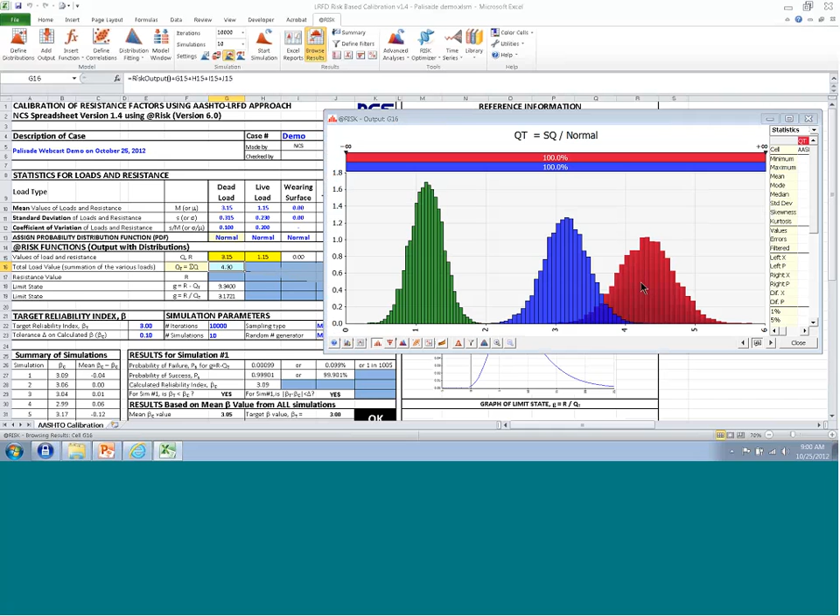Okay, now on top of this, I can come and say, okay, I got this load in here. Let me clear the overlays. I got this load.

Now I want to see what happens if I plot the resistance on it. So I come here and plot the resistance. Let's see what it looks like again for the first simulation. Look at it, what do we have here? Isn't that nice? I got this load curve and a distribution curve exactly like what I was teaching you. See that here?

Load, distribution. I can actually go and zoom in on it, and you can see the overlap between the two in terms of the histogram. I'll show you smooth curves in a minute, but now you see that they are overlapping and how much they overlap.

All right, let's go away from here now. Let's zoom out, and let me minimize this one. And now here is something I'm going to do. I'm going to leave this one on here, and we are going to do something interesting. We are going to actually run a calibration.

My goal is to run this calibration and see whether it meets my expectations. My expectations are as follows: I want a probability of failure of somewhere around 1 in 700. Look at that table up at the top. 1 in 700 is about a reliability index of 3.

Because this is a civil engineering feature, I know the normal range is 1 in 100 to 1 in 1000. So let me aim for 1 in 500 to 1 in 1000, or an approximate reliability index of 3. That's my target reliability index, and I said I can live with a range of plus or minus 0.1. Look at it as follows.

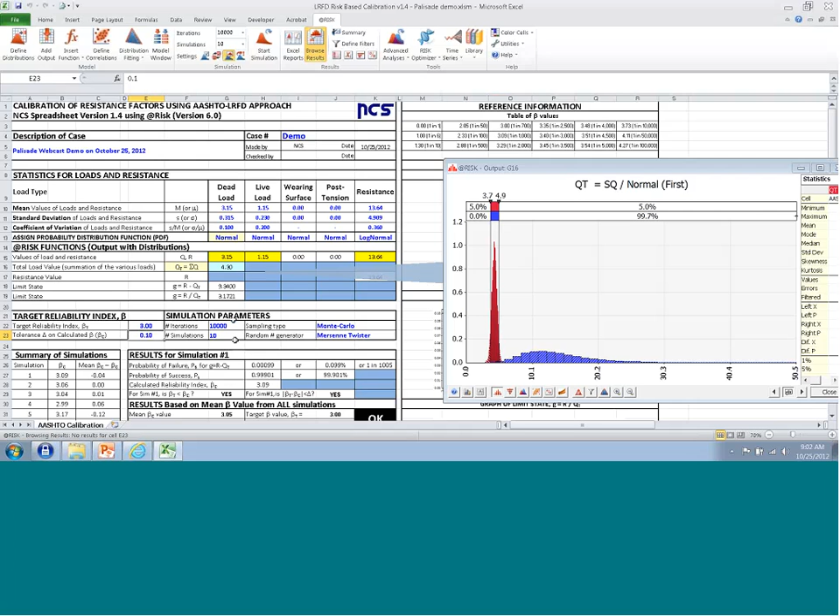I'm going to run about 10 simulations in this one. I'll set up a table here: 10 simulations, and in each simulation I'm going to put in 10,000 iterations. I'm going to use a Monte Carlo simulation with a random number generator of Mersenne twister. How do I do that?

Well, you go up here and you see the settings. I set up the 10,000 iterations and 10 simulations here. I can actually go into the settings and set the same numbers, 10,000 and 10. And if my computer has multiple CPUs, like it has got 8 CPUs, I can enable that function there, and it will run faster.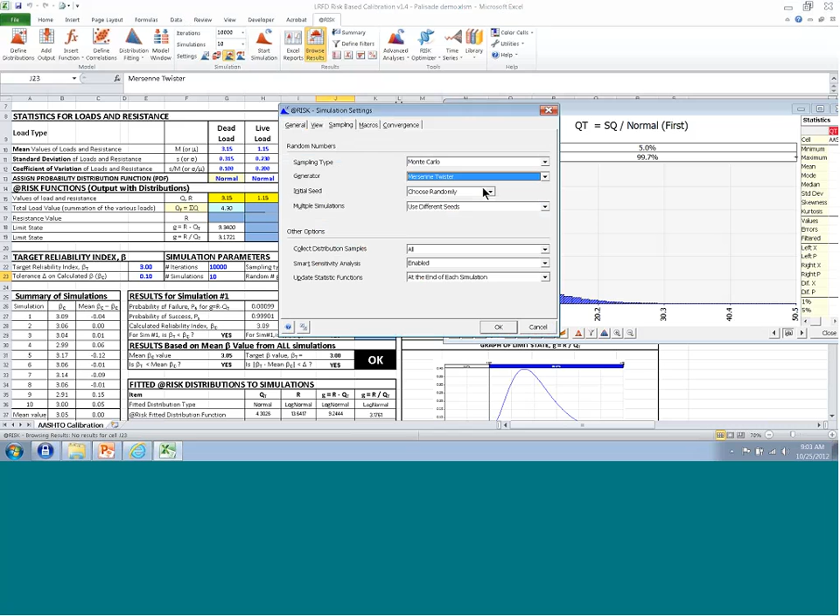Then I can go into sampling and say I want to use Monte Carlo simulation. You also have the option of using Latin hypercube. Then you're going to choose randomly, and then you're going to go in and say what random number generator to use. I'm going to use the Mersenne twister, which is as good as any for my purpose, and then I'm going to run it.

Okay, how am I going to run it? I'm going to start my distribution or simulation here, and what I urge you to watch is what happens to this particular graph here. You will see that with each simulation, this graph is updated.

So let me open this out, and I'm going to start the simulation. It will take probably a minute or so, so be patient. And I'm going to start that simulation.

Look at the right-hand side table which came up. It's going to start in a second. It started the first one. And you see these graphs now changing? That is all the random simulations which are going on there, and I'm on simulation number 10, and then it did it.

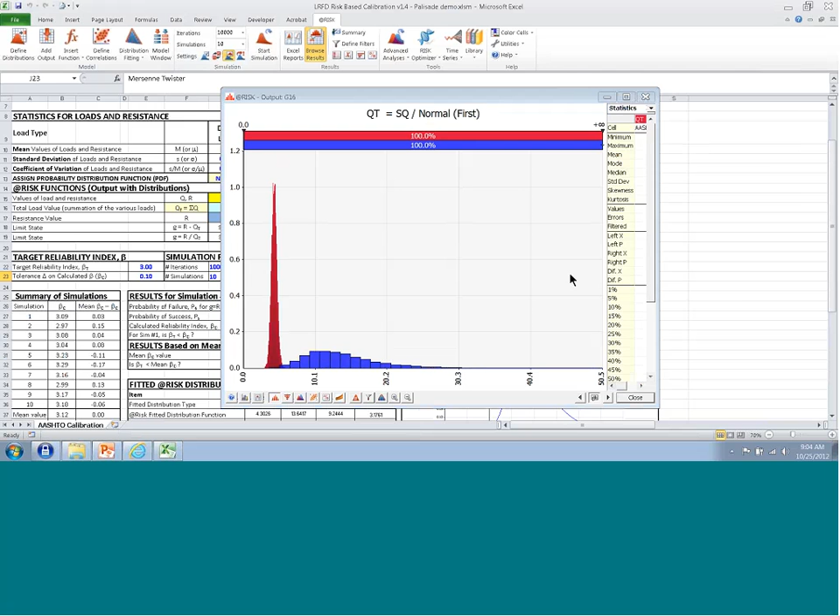And what it's doing is writing the data now. And what had happened was that it wrote the data. Let me close this thing out now, and let's look at the results.

Okay, what I'm going to do is look at all of these different simulations where I got different beta values. I'm going to look at the first simulation here, which is 3.09. Instead of having that curve here which was overlapping in browse results, I'm now going to fit an actual curve to that one there.

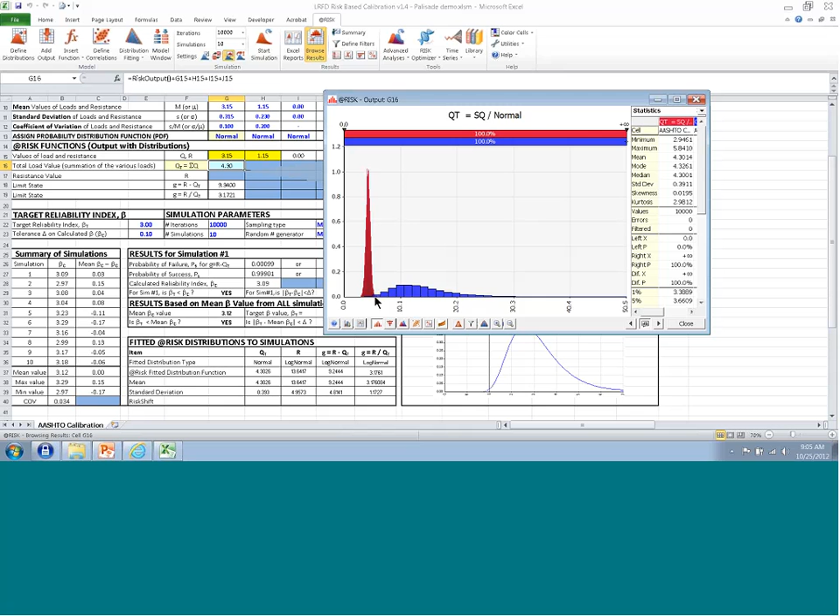And how did I do that thing? Here is how I'm going to do it. For example, if it is resistance, I'm going to browse the results. I can go into distribution fitting, fit a curve and see what happened. I figured out it's log normal, so log normal is the first one there.

I can take that log normal function, the one which was fitted, the smooth line, and write it to a cell. What cell am I going to write it to? Here is what I'm going to do - I'm going to write it to this particular cell of resistance and say okay. So what it did, it now brought in all of the formulas in here, the mean value, the standard deviation, the risk shift and things like that.

And I can do the same thing for the load also. Once I do it here, the smooth curve, I can go into define distributions and look what I have - smooth curves, textbook style, like what I was showing in the presentation.

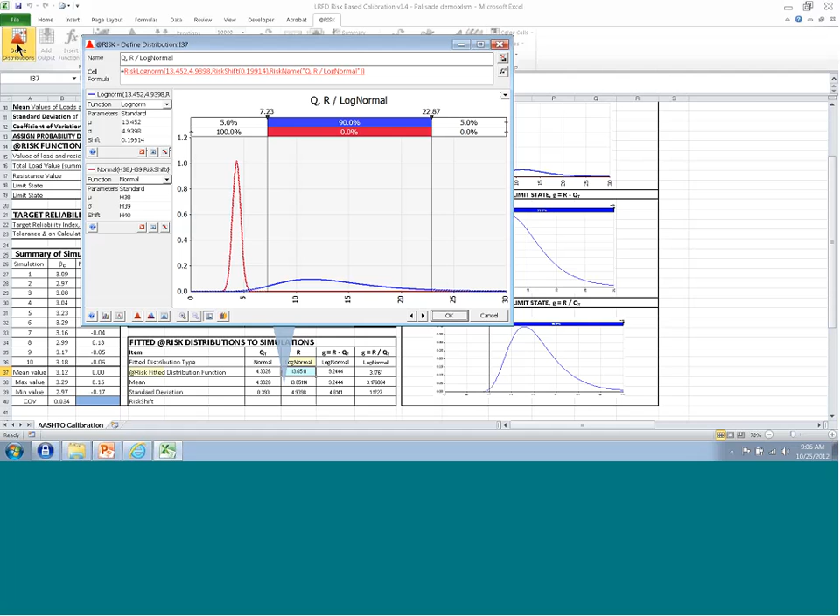So now let me zoom in on this one here and let's play around with this a little bit. You see this overlap zone in here? Let's try to zoom in on this one. Let me do one thing - let me just move this somewhere here. I'm going to zoom in on this one.

And look at this overlap zone here. Does it look like anything, the eye candy which I showed you, which was perfectly symmetrical? Well, it was perfectly symmetrical because I had normal distributions. But in reality, it can be anything there, and you can have this overlap zone here.

Now, the interesting thing about the overlap zone is that you can now see these two tabs at the top - the blue is the one for the resistance curve, the red is for the load curve. Now let me move this tab here. If I go to the center of this one here, it's 5.53. Let me try to adjust it there. I'm going to try to put 5.49. It's almost right on the intersection point.

Here is something interesting. What you are finding out is that for the red curve here, there's a 0.1% chance that your load would be greater than the resistance. While for the blue curve here, you see that 0.7% of the curve is still on the left-hand side of the intersection. So there is a 0.1% probability that your load would be greater than the resistance, and there's a 0.7% probability that your resistance would be less than the load.

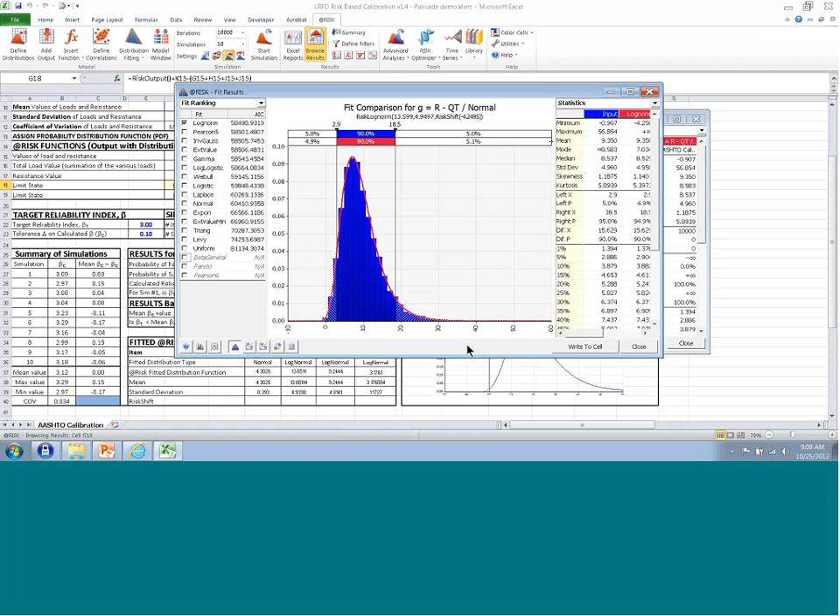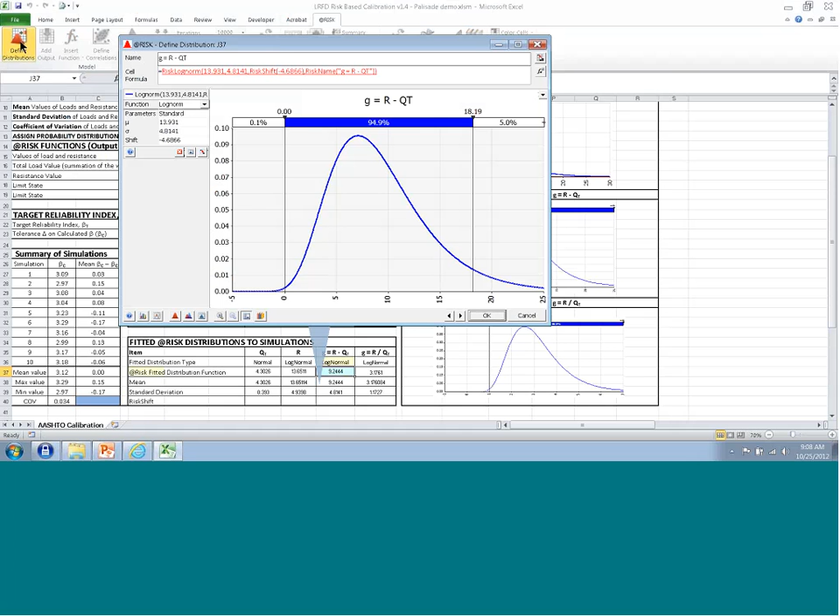Now I come in here and say okay, I'm going to fit in a function. I get a certain function in here, and what I'm going to do is write this function to this particular cell here, G equal to R minus Q, and I'm going to look at the distribution here. Look at that, something very neat happened here.

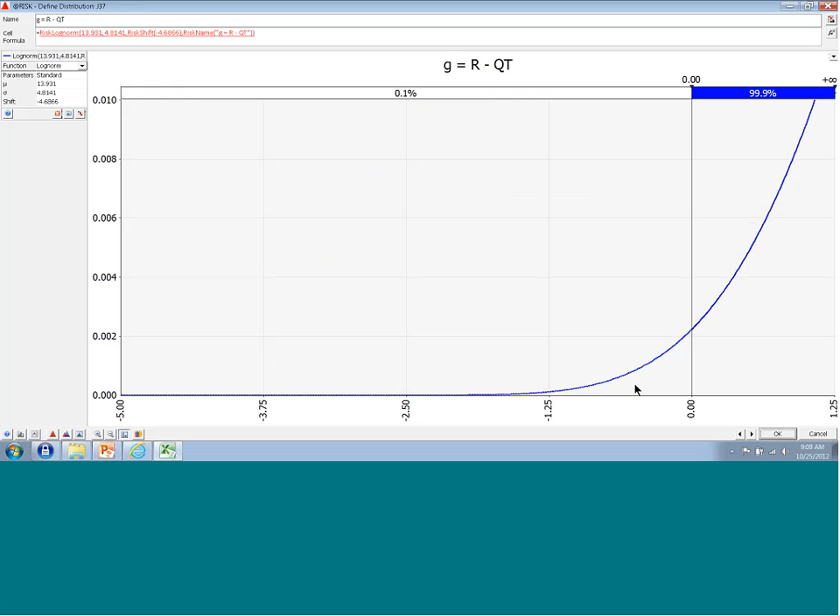I've converted it into a single tail distribution, and the area of the curve to the left-hand side of 0, you see this one here, is the probability of failure. Let me zoom in on it. I zoom in on that one there, and I can see, okay, now this is pretty much textbook style.

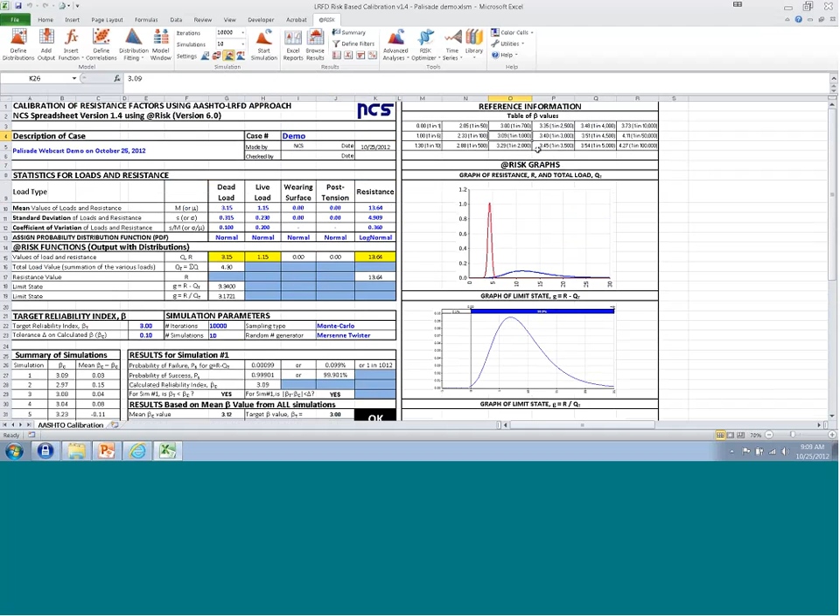If I were to measure the area under the curve, that's 0.1%, and if I'm 0.1%, then what is the probability of failure there? Well, actually 0.1% happened to be 0.000099, which is 0.099% of failure, which is 1 in 1,000 approximately. 1 in 1,000 is what? Let me go to this reference. 1 in 1,000 is approximately 3.09. That's what I get here. How did I get that one there?

I used the Excel formula minus NORMSINV to get that reliability index. Now that met my criteria that I'm greater than 3.00, and therefore I'm okay.

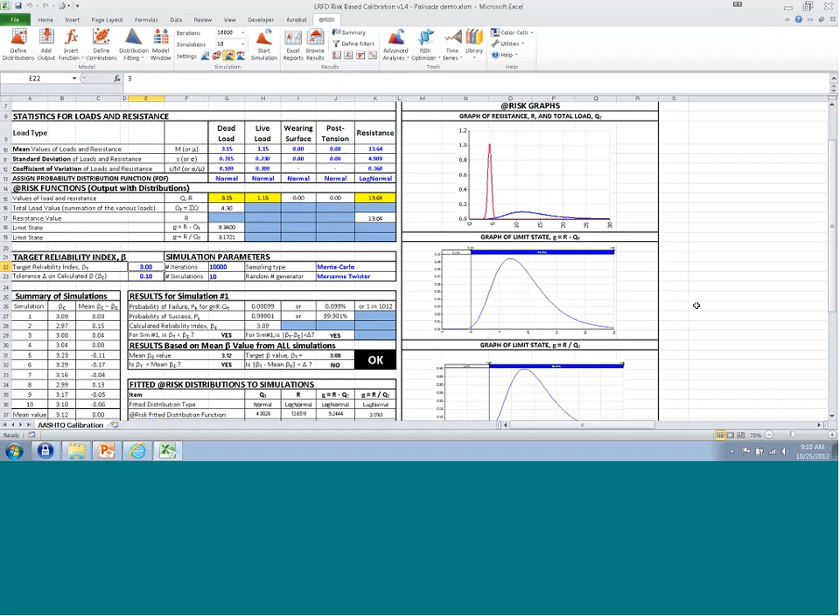It's already been an hour in this presentation, and I could keep going on and on, but there's no point to it. I mean, where does it end? I could go on for 2 days on this one, but I've achieved the goal of this presentation, showing you how @RISK can be used for doing LRFD calibration.

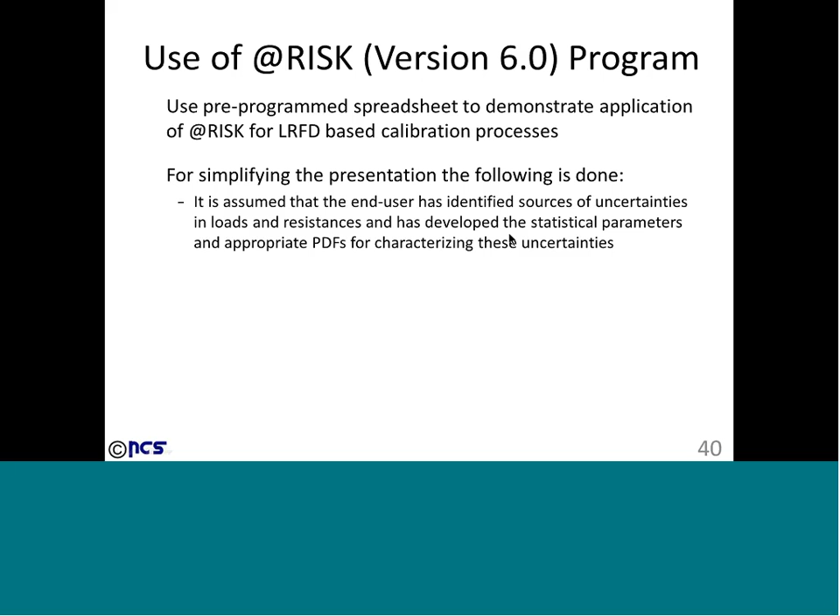So let me go back to my presentation here. What I told you is that I used a pre-programmed spreadsheet with certain known uncertainties, using a particular system. What really came about in this presentation is that I discussed the concept of LRFD, and I demonstrated that the @RISK program can be very useful in calibration of load and resistance factors using Monte Carlo simulation. You can use Latin Hypercube also.

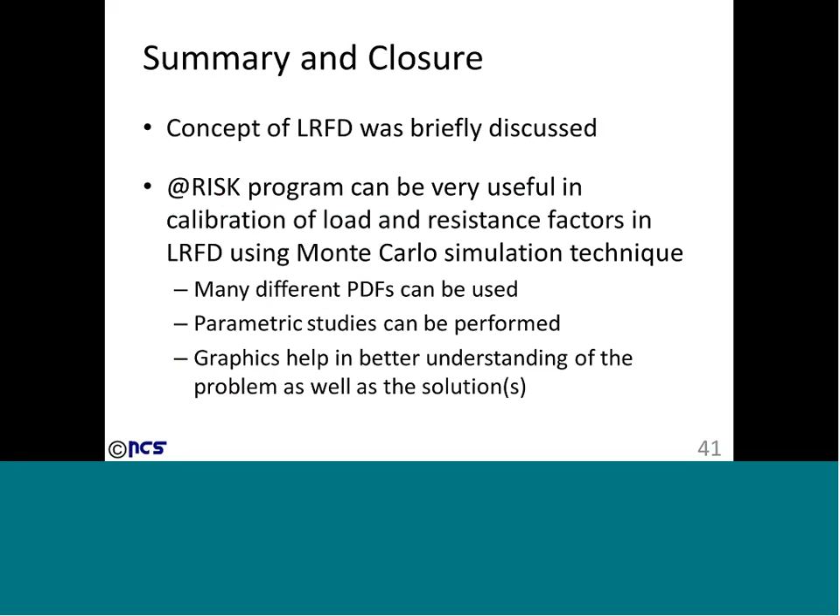The beauty is that you can have many different probability density functions. You can perform parametric analysis, and when you look at the graphics, you get a much better feel of what you are doing, because if you don't have those kinds of graphics, you are always imagining things on how it might be. So that really brings me to a closure on this one.

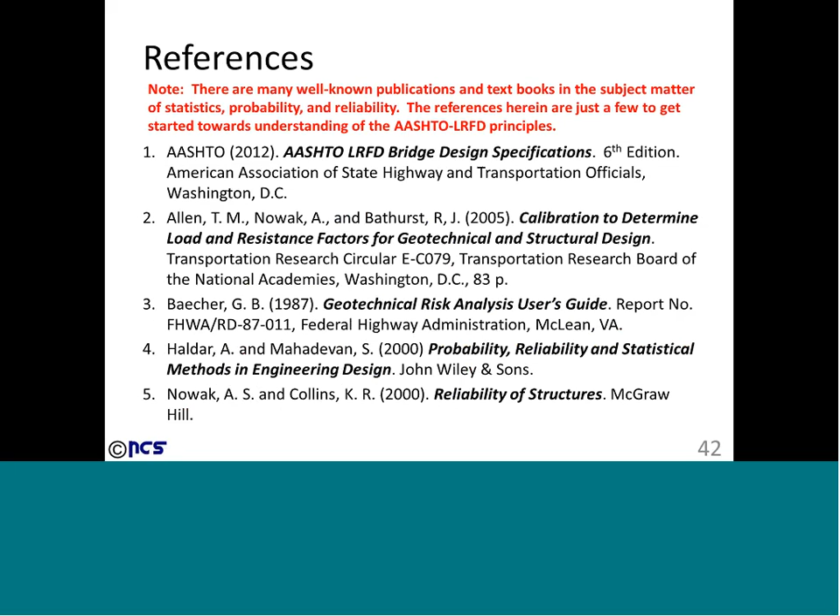And then, of course, the Palisade thing, like Jameson mentioned right at the top there, you can have the demonstration version, the trial version. You can freely download it and play around with it. There are also a couple of articles which I've written which might be useful to you, and with the availability of Google and Bing, you will find nice PDF distributions of several different ones there, so that's what I used.

And that really brings me to the end of this presentation. It's about an hour, I believe, Jameson. So what do I do here? Are there any questions?